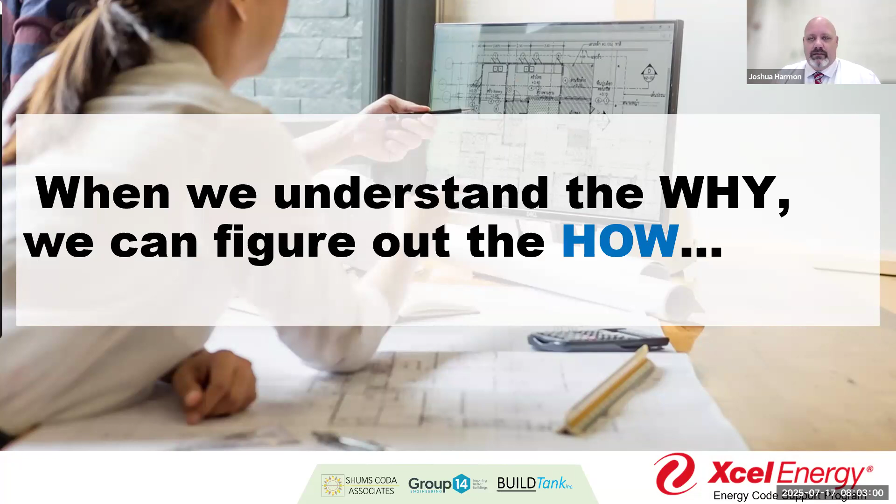Knowing what we know and knowing how you guys know, I like to discuss any type of code conversation. Literally, I'm here for a local government summit, and I've brought the same slide to their presentation, just with a different background. But understanding the why behind the question is really one of those important things that we need to think about as part of this conversation. And understanding that why, I think, is going to be something that really is fundamental to figure out how we properly inspect.

What are we looking for when we do inspections? And when we think about the purpose and the intent of our construction codes, like the larger context of why we develop codes, it's in order to provide that minimum consistency, that uniform consistency in how we build buildings and how we expect buildings to perform in order to maintain that safety, that life safety component. And life safety is not just this fire protection only conversation. It's all about the entirety of how we build communities.

It's more about community safety, right? If we don't have energy conscious policies, or if we don't think about ventilation - how much air do I put into a room, a bathroom, or something like that - that's a life safety issue. But in reality, it is about how that community is going to be successful. So when we talk about some of these expectations, one of the positive things that you have as a state is that you have a uniform statewide building code, right? And so you have uniformity, you have consistency in how we apply building code regulations.

So again, energy conservation, energy use is one of those considerations within that system of building codes. And we know that the energy code specifically is less about telling you what to do and more about providing you the flexibility to do. I was in code development, I was in hearings all week this week for different states and projects, and I was at my home state yesterday before I got on the plane. And we had this long discussion about what we introduce into the new model code.

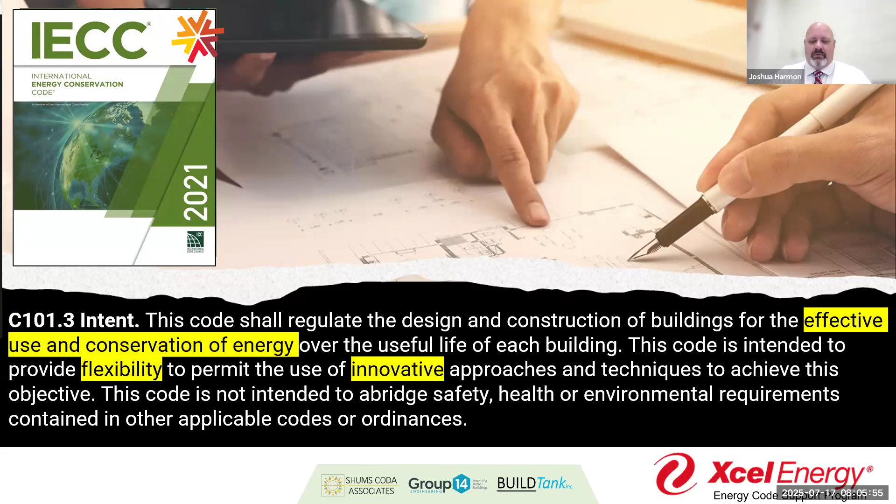But really, we all recognize that, or should recognize, that energy code compliance or general code compliance becomes on paper, right? It's knowing what are those systems, providing proper documentation. We had a conversation with a fire official this week where, why aren't you requiring more details on building plans. And part of the reality is, well, because we don't know what material might be used, or if we make a change in the field, we don't want to come back and say, well, that material is not part of the prescriptive components of your construction details.

So resubmit for plan review, right? We put general terms in like manufacturer's installation instructions, because we expect that when they're installing it, we use the example of roof. Nobody ever submits into, typically, at least not in the plans I get, nobody usually submits on residential construction, especially, the manufacturer's installation instructions for an asphalt shingle roof.

It's just not in there, right? We know that the instruction is on the actual bundle, so when you go on site, it's going to be on the packaging how to properly install it, and when do you put ice barriers or those kinds of protective drip edges and protect those drip edges against water infiltration.

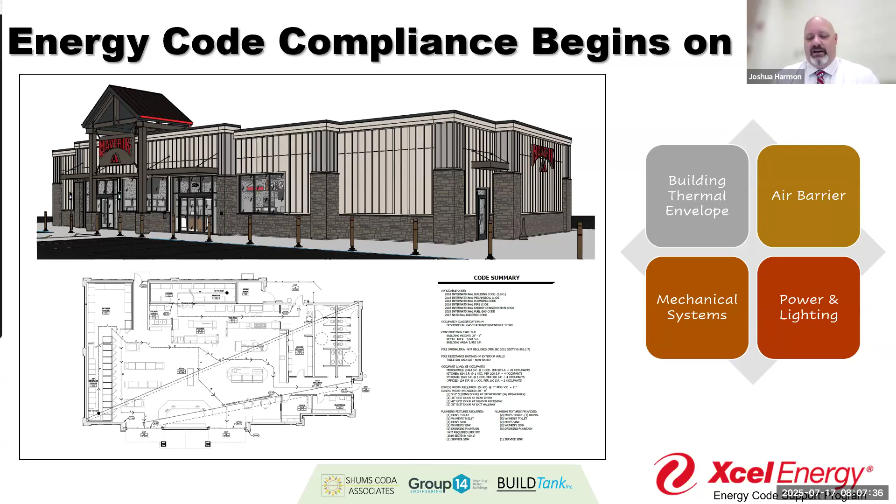Those are all things that we understand begin or recognize through paper, and sometimes it's in simple conversations, simple notes that say these items will be installed in compliance with the manufacturer's installation instructions. But ultimately, no matter how good a plans examiner you have, there's going to have to be a level of inspections required, right?

The building code requires in section 14.5.3.9, it gives us a list of different expectations and times when the inspector, the building official, is empowered to do inspections to verify that things are being done. One of those items listed in the commercial code is weather resistive barriers and energy efficiency inspections, right?

We need to be able to set up what are those expectations. If I'm going out and doing a variety of different things, we're trying to talk about where are places where we can have that efficiency of inspection—not just energy efficiency, right?

If I'm doing a framing inspection, if I'm doing a rough in for my mechanical, plumbing, or electrical, there are certain things when I'm looking for those penetrations through firewalls, whether that's commercial or residential, or through wall assemblies or different spaces, my thermal envelope. Those are all going to be times when I'm doing that rough in—I can look for the air barrier, right? You can see the potential there for that.

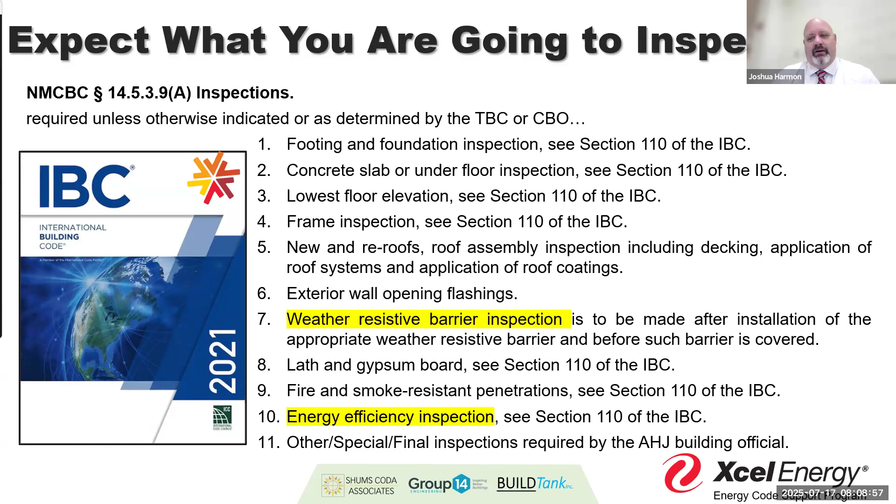Whether that's in the commercial code or the residential code, we understand there are provisions for us to do those individual inspections. Throughout the context of this training course, we are going to talk a little bit more in depth about the different components in that inspection process.

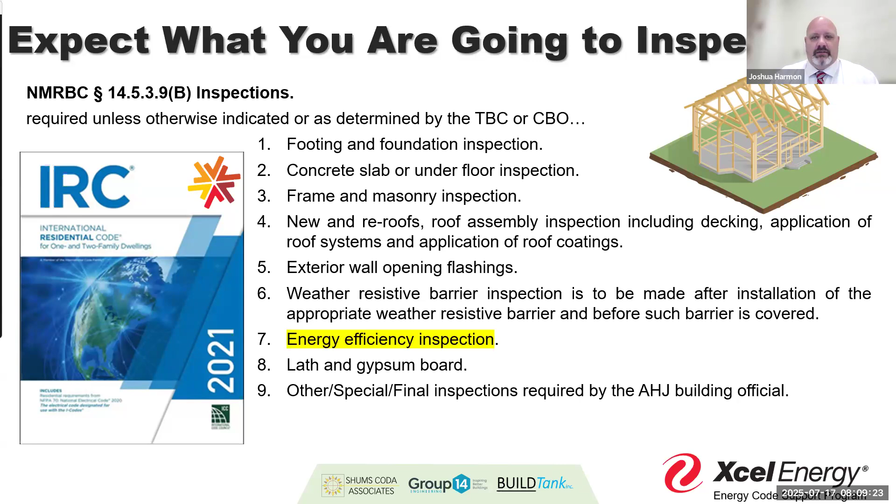One of the technical resources that's going to be on there, or should be on there now—if not, I'll double check, I thought it was on there, but we're updating it. Right now it's for the residential; I think we're updating it for the commercial to make sure that's on there: our different inspection field guides.

Now, I told you we're working on some for plan review as well, so those should be coming up soon. Let me see if I've got it in here. Field guide... I don't see it on there in my file. I'm not looking at the website—I'm looking at, I'm not seeing it on my desktop.

But again, those are going to be resources that you can go to kind of help guide what we're expecting. It's not so much from us as the inspector—I find this is a resource I like to give out to contractors: what are you expecting when I come back for a rough in? If I'm doing framing, what am I going to look for? And then we give a little bit of description in that guide to help that process along.

We also know that the state has a lot of great resources, so whenever you get it—most of you should have access, or I'm guaranteeing you've probably more than once visited the state's website in order to look at different forms and application forms that they have there. When you scroll down to the bottom, we have the checklists that exist, whether that's a thermal bypass inspection checklist, the duct sealing inspection checklist, and different resources the state provides.

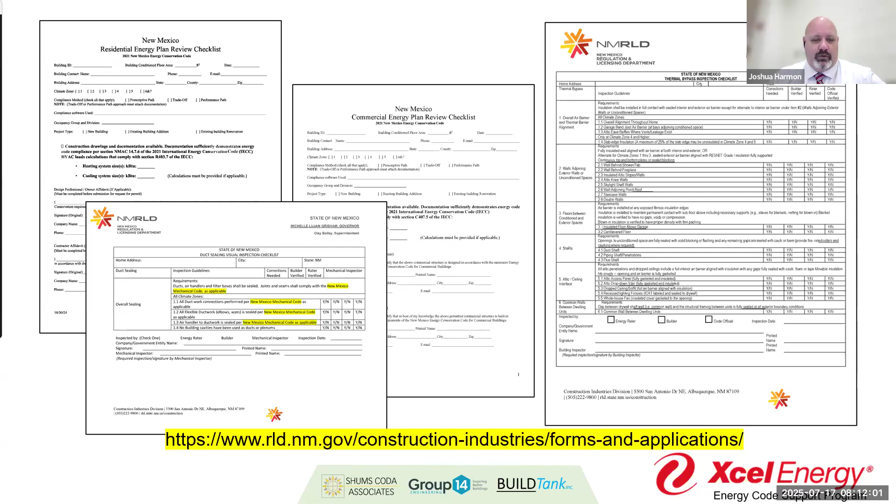The last thing you want is to talk about energy efficiency, but then lose workflow efficiency, right?

Getting back to this overview of what we're talking about, when we think about the primary components, or as I like to call them, the four pillars that make up the requirements of the energy code, I tend to understand them simply. Energy code is these four things: thermal envelopes, air barriers, mechanical systems, and power and lighting control. Those are the things that in my brain, every time I think about energy code, that's where my brain goes.

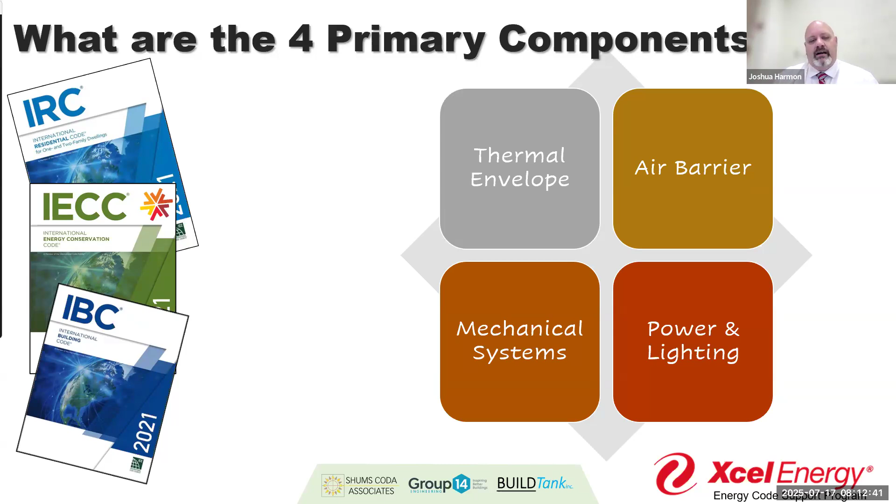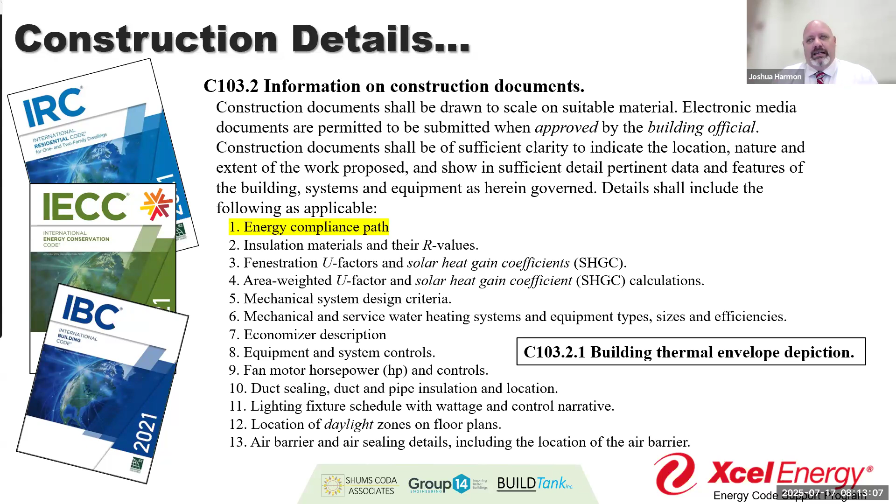How does this compare? Where does this issue relate to one of these four pillars? And it's in that conversation that we understand first and foremost what are the requirements to identify that compliance path. Whether we're talking about the way we design it, review it, or inspect it, it's important to identify and know the compliance path because that's going to affect how we verify or scope our inspection process. It's one of those requirements the code provides.

It's supposed to be on details, but as an inspector, I need to know what the compliance path is, because if I'm following a prescriptive path—and we know there are three different paths provided in the code—let me get my laser pointer out. If I'm using that prescriptive path, then I'm literally checking these things off on a box. I'm going through and I can use one of those inspection checklists, or a field guide or some visual assessment tool, and say these are the things we're looking for, and you're complying with everything.

So that's part of that conversation we need to think about, and again, when we think about how that's different from a simulated performance or ASHRAE compliance in commercial, or one of those performance ratings on the residential side of the conversation, right?

Well, in a performance path, I'm not the only person verifying compliance. If you're doing a simulated performance, you've given me a proposed set of conditions, and that gives you flexibility, that trade-off, to come back and say, well, we're going to change this up and go this direction. We're still going to get the same target number, dollar value, or performance evaluation index, but you have a bit more flexibility than with a prescriptive system.

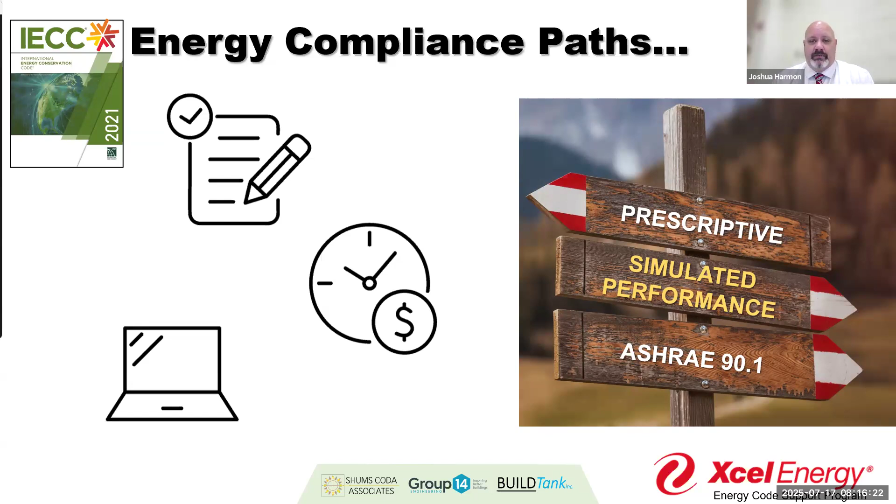Now, one of the questions we have in the chat: if a submitter chooses prescriptive, do they need to submit the REScheck or COMcheck? Actually, no—it's an option within the prescriptive path.

So when you think about prescriptive compliance—and it's a great way to move to this slide—prescriptive compliance is performing compliance with all the requirements of these five sections, especially in commercial. Now, residential, we know the additional efficiencies are not part of the prescriptive requirements of that section for residential, but within that building thermal envelope, there are certain things we're looking for.

A lot of time, a res check or a com check, which we'll be talking about more in a couple of weeks, is a great way to centralize plan review and changes to that insulation value. But res check and com check are really just a way to trade off, or to more directly say, here's all the insulations that should be in this building.

An example would be, and you see it a little bit more in commercial I think than you do residential, but you could say here's my wall detail, and instead of every one of those 15 different options, I might have a slide that helps that conversation.

So in the context of, I can have all these insulation options within my design on my sheets, and my res check or my com check is going to have a very simple evaluation. It's going to say you're going to have a U factor of this, and it gives you that flexibility to change it around. We'll talk a little more about that.

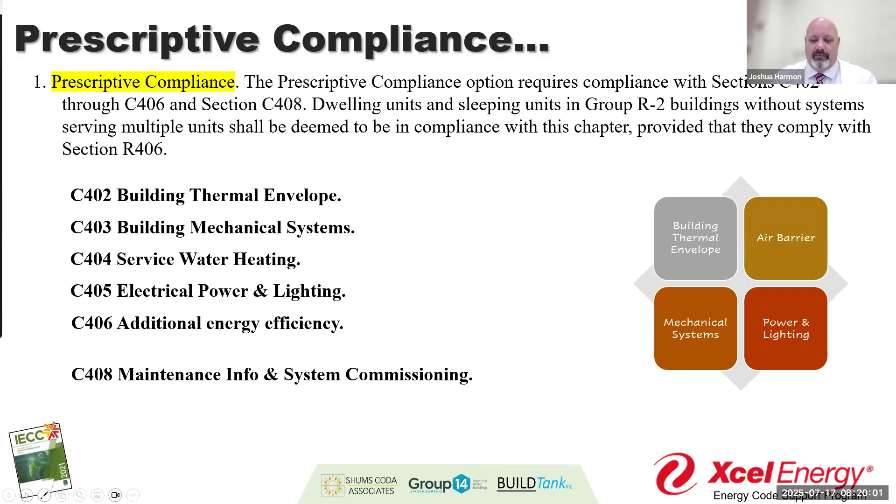So hopefully that answers some of that, and we can always talk more about it later as we go through the rest of these slides. But again, prescriptive is telling me I'm going to be looking at all these sections and looking for those requirements and expectations. If I'm doing that performance path, I'm looking at a report, and I'm just making sure that the minimum things of the report are in there.

So is it possible that I could build a building that has no insulation? Absolutely. I could find a way to track that heating and cooling load and get it down to an all glass building. That's why the code, and we can talk more about that later, says if you have so much glass, you have to move to performance, because it's not required to have an R49.

I could go with an R25 and still be able to, I could have my fire rated assembly style, and just call it a day and find a very efficient mechanical system, and with lighting controls probably come close to getting what the code would require. It's all about flexibility, right?

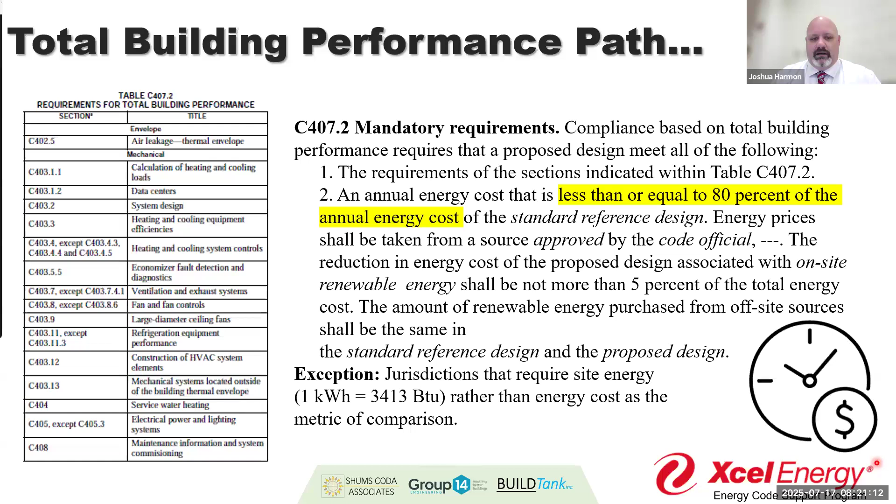Like I said, a little bit about ASHRAE. ASHRAE 90.1 has its own 3 processes: prescriptive, energy cost budget, performance rating. Very similar to our normal energy code, but again, it's a completely different way to look at it.

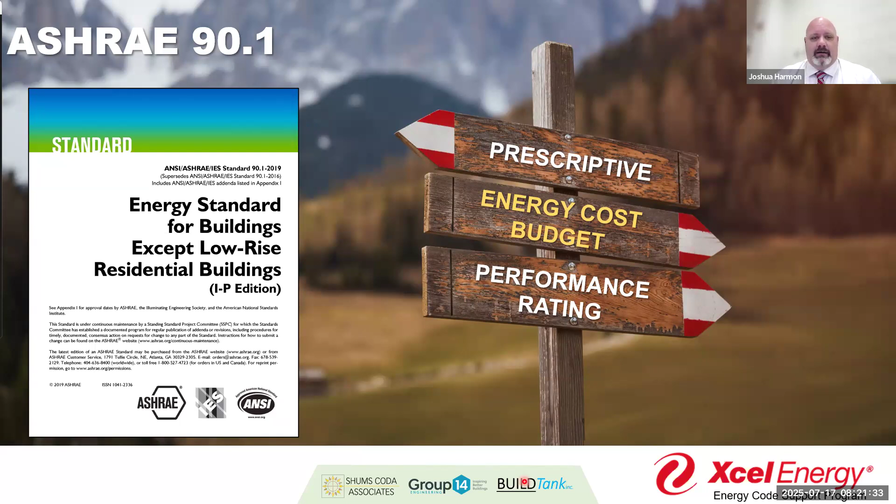And maybe someday, if we have more questions or an interest level, let us know in the survey if there's an interest level. We could talk more about ASHRAE 90.1 as a code.

But again, when we go to do those inspections, we normally see them in these 4 different contexts, and it's all about understanding what those expectations are, right? That's why we've kind of broken our little guide there for residential, and eventually for commercial, into these 4 pillars. You can tell who helped draft the first set, because I'm all about my 4 pillars or simplified designs.

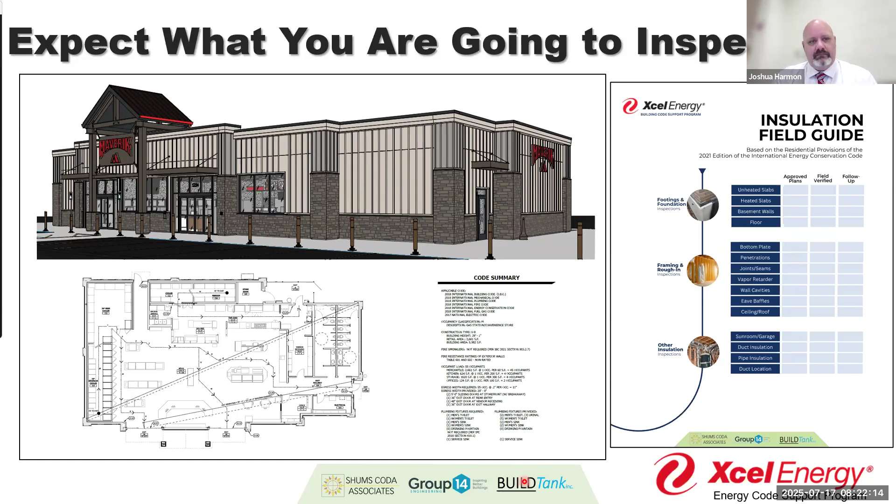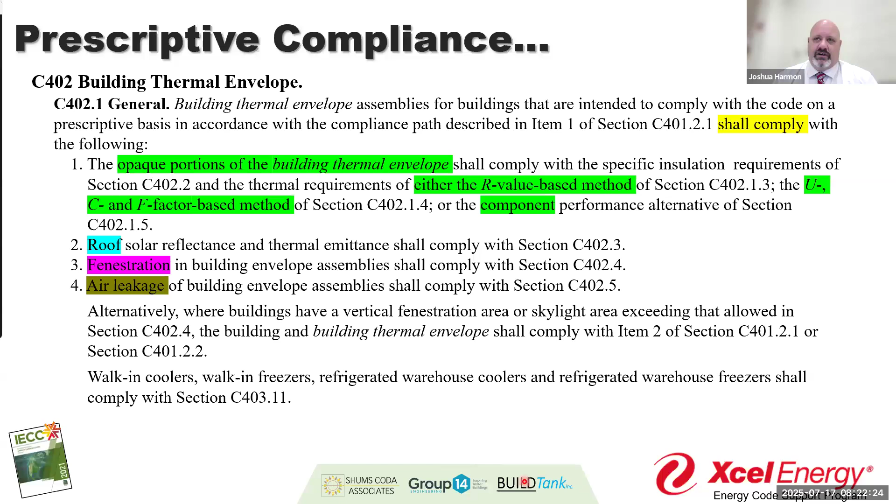When you think about the prescriptive process and the envelope itself, we're looking at a variety of things, whether that's the wall, the roof, the fenestration, the air leakage of that envelope, because we're really trying to control the envelope and how it affects heat loss and heat gain. The building's exterior wall envelope is defined in the building code as that series of materials, components, and assemblies that protect against the effects of the exterior environment, prevent the rain, right? The rain that just came through the Panhandle and maybe part of Clovis.

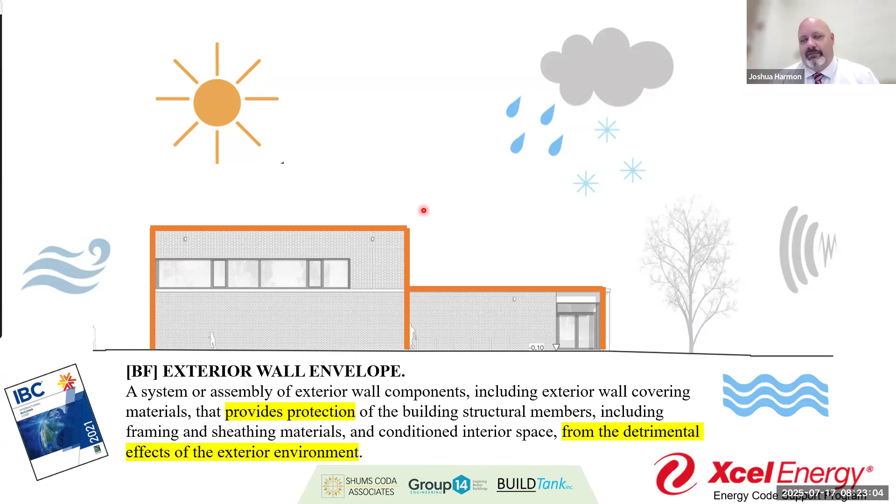In this northern part of the state, I was able to stand inside the building and not get affected by that rain. However, I'm not as sure that we're protecting against the thermal envelope, because I can feel the humidity of that rain inside the building. That's where we get into the building's thermal envelope, which is trying to enclose that conditioned space and isolate it so that when I sit in this room, I'm not affected, or I'm less affected, by the 84-degree temperature and high humidity right now outside.

That's the difference between a wall envelope and a thermal envelope. One is to protect us from the environment. The other is to enclose and isolate conditioned space. So think about those when we think about our inspections. Are we looking for the wall envelope, or are we looking for that thermal envelope?

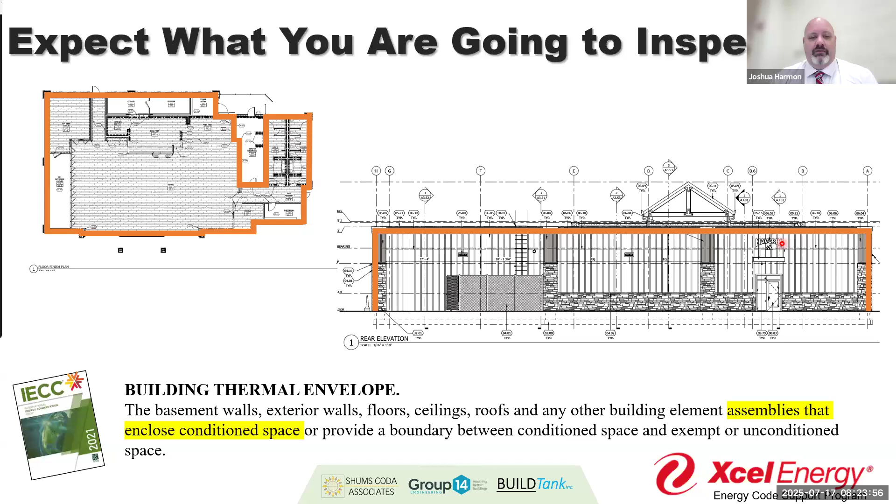This is probably one of those great places to remind us that the code gives us ways to lay out those different assemblies and the insulation that we associate with them. I find it easy a lot of times to relate to our fire rated assembly concepts, and so some of those expectations about the continuity that we see within fire rated assemblies, we need to see that level of continuity in air barrier and thermal envelope design.

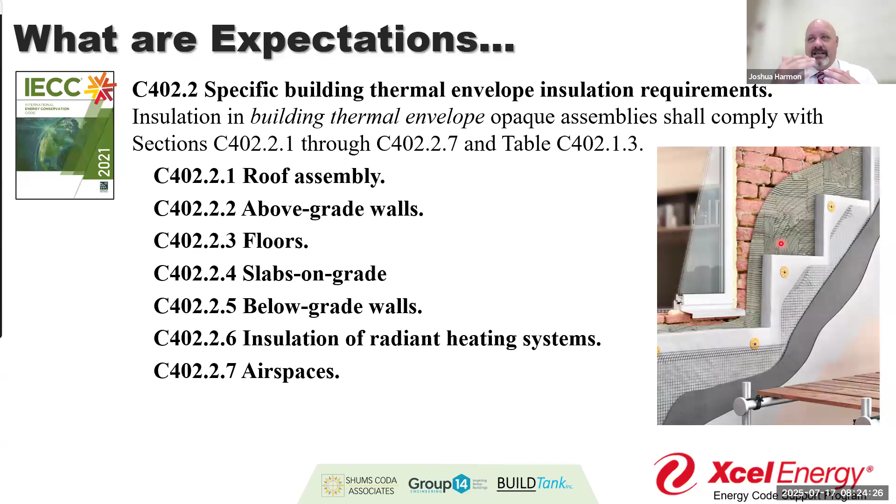A lot of times in commercial, that's a little easier than in residential. One of the things we're going to be doing here in Amarillo at one point soon is trying to set up a building community coffee, or coffee and code conversation, where we're going to go to a house and try and smoke it out.

My plan is to do smoke barbecue and smoke the house, make it a smoker's day. That way we can have some food while we watch the building pressurize, and then see if there's air leakage and how much air leakage we're having.

Those are good things to think about when we talk about those inspections. We'll get more into those air barriers and insulation later.

When we think about our inspection field guide, the way we laid it out was based on my expectations for inspections. I typically do footers and foundations at the beginning of a process. So I've separated those out, or we tried to separate those out, and say, depending on what we're doing, what's been approved, and where it's at on the approved plan.

This might be something where you mark it down and say this is on A3, and we don't have a heated slab. We're doing basements versus a floor or a slab, whatever might be appropriate. And then, what did we do to verify those things? This is just a simple resource we put together to help.

Similarly, when we start talking about those framing inspections, those rough-ins, what are we looking for? We're looking for that bottom plate. We're spending time looking at it to make sure it's connected to that foundation. It shouldn't be too much time—it would be very quick for us to check, while looking at the bottom plate, for the right connections, whether we're bolting or whatever we're doing.

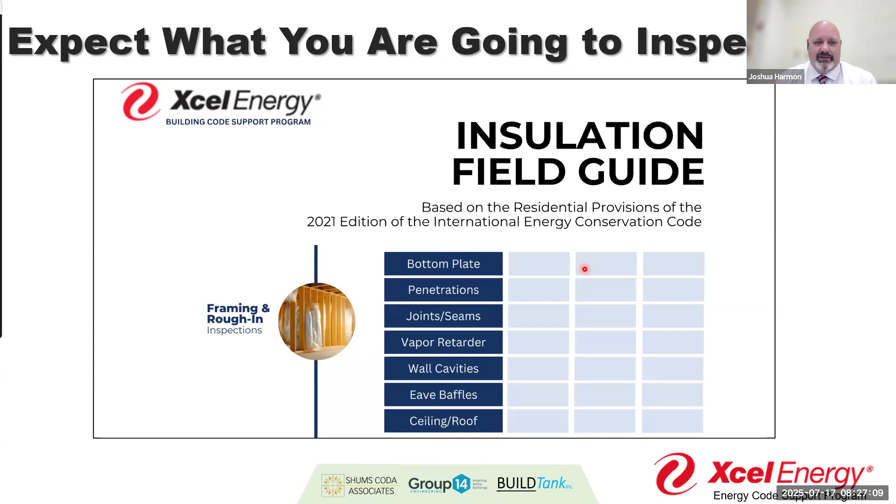Think about it in those contexts: how do I do a framing inspection and then roll in my energy efficiency components? We don't want two inspectors looking at the same thing. We want one inspector doing the job.

Thinking about insulation expectations and the ducts, whether they're going to require insulation or not. If we're doing sunrooms or attached or detached garages, we're looking at those garages for firewall separation, and making sure we verify thermal isolation as well.

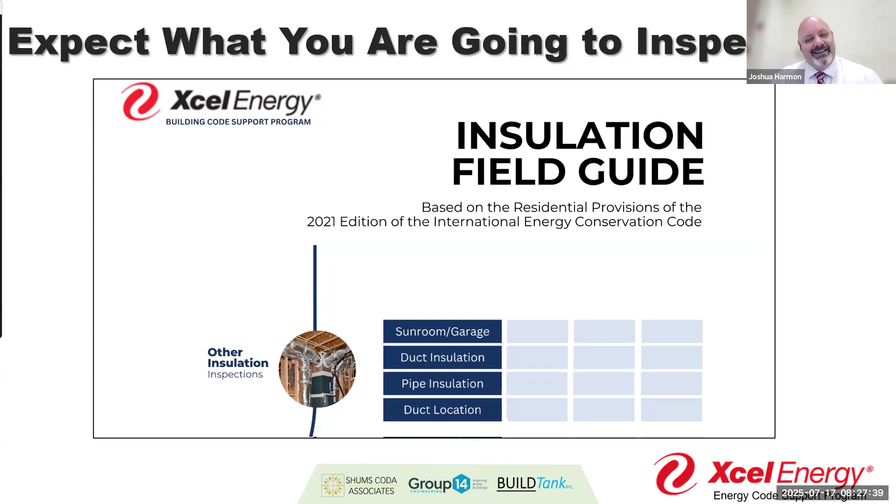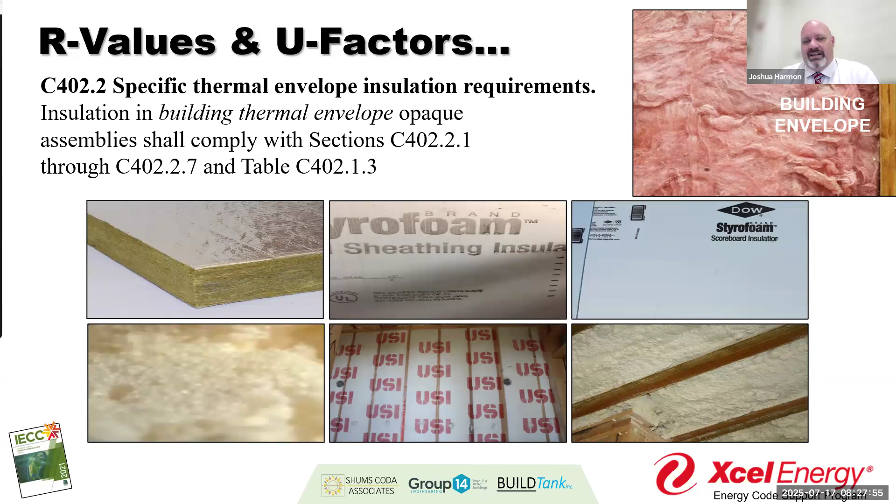When we talk about these types of things, we need to understand that there are a variety of materials that can be used to insulate these wall systems, which is why compliance paths are so important. We could start to see some trade-offs and movement within the material as long as we understand how it's going to affect the building.

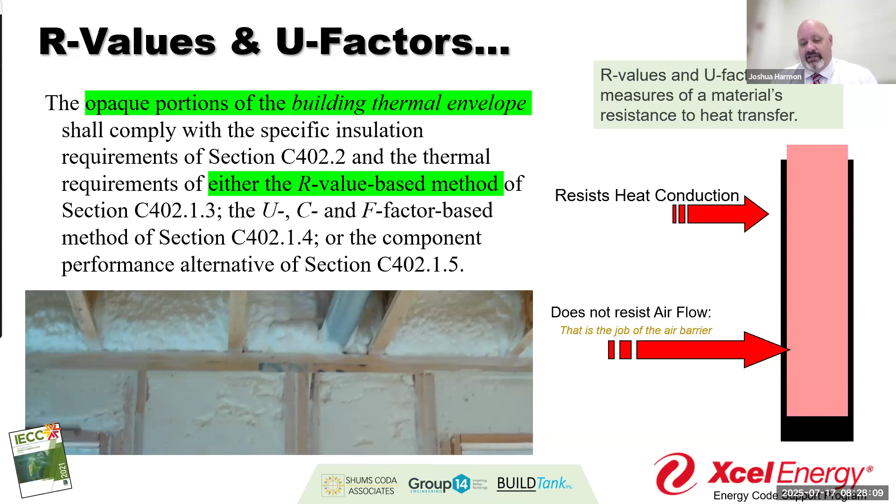Knowing that also ties to whether or not we use REScheck. Am I doing this compliance based off an R value? If there's an R value, then I'm going to look at this particular table, whereas if I'm using a U factor, there's the U factor.

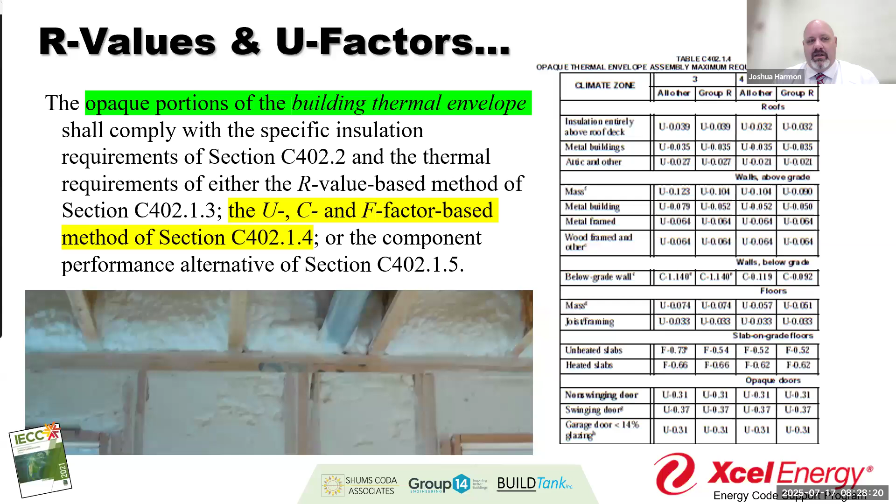If I'm looking at a U factor, which is the whole assembly, not the individual cavity material, but the whole assembly, then I'm going to be looking at a different table in the code, and more importantly, I'm starting to get that flexibility in how we calculate.

Remember, the U factor is a calculation of all of the materials within that tested or evaluated assembly. There are a million different resources and ways to find it, but in this process, we're adding together a wall design to get to an area weighted U factor.

We can start with an R13 and that R13 gets us to this 0.057. But what if I change that to an R17? What if I don't go to the R19, which is 0.0446, but I want to go to an R20 with 3.5 continuous? Can I do it?

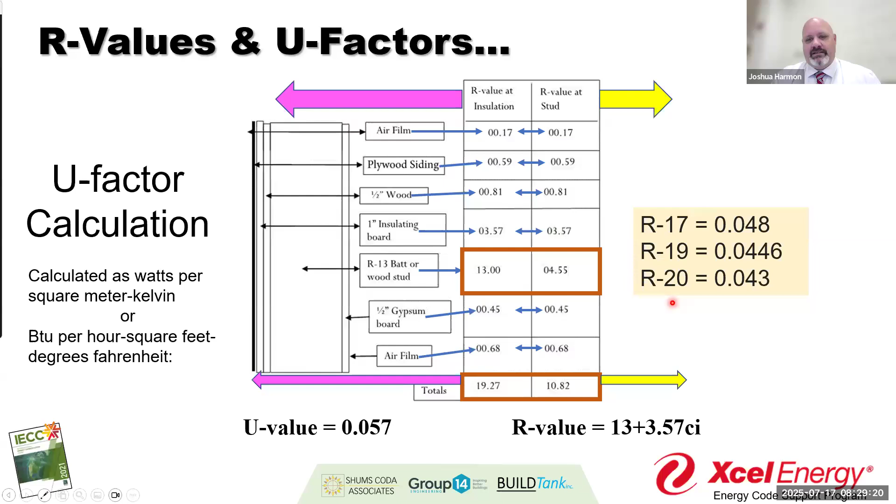There's a prescriptive way to do it. Yes, there's also the R value table, and there's a U factor way to do it through the U factor table. So again, that provides flexibility, but that's not the only way we see it. Kind of like we were talking about, REScheck and COMcheck come in, and they're not the only ones—those are just free options on how to provide that total UA.

Different wall companies—we've shown one from Dow, and I can't remember the other one—will actually help us create those calculations. We've talked about resources during our insulation deep dive about ways to include all those components to calculate: when do I need an air barrier, what type of material am I using for insulation, what's my wall size, and then what is my calculated U factor?

Again, it's math, it's not science. So part of it is finding the right calculator to get you that information.

So again, what we're trying to show is that we have that flexibility, and sometimes those COMcheck reports are going to be used for us to say, okay, what different options do I have within that insulation variable?

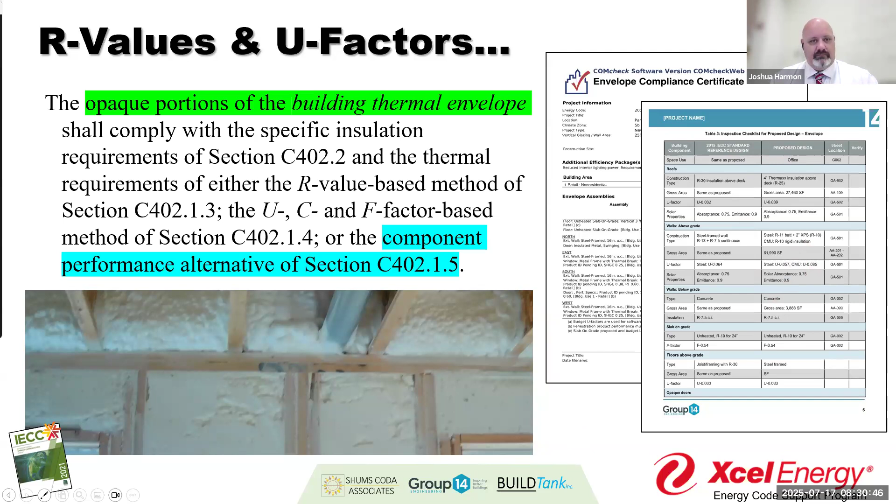We can see all kinds of different insulation schedules. I'm seeing more and more where designers are taking—I'm not saying it's the easy road, but it's a little bit less paperwork—insulation schedules put into the document, into the spec sheets up front, with notes, and then the detail pages all say refer back to page T3, page H, or G2.

The table is there so that they're not going through and recalculating all the details. Because there's going to be some plans examiner like myself who says, well, detail 3 on page G6 or A6 is not consistent with detail 4 when it comes to insulation. Yeah, we missed that one.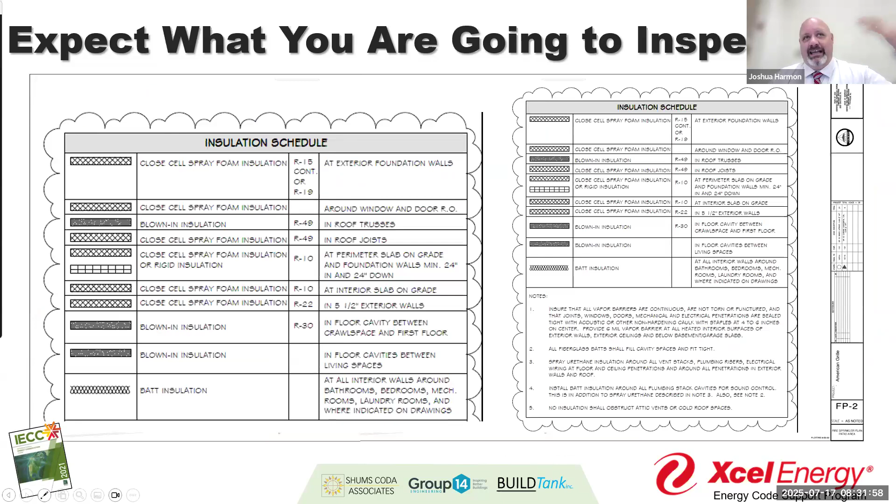So again, you'll start to maybe see tables that show up to allow for that flexibility in design, and we'll talk more about that as we go through. Proper installation and proper inspection means knowing what those things were and making sure they're on the plans, because I can't do it if it's not on paper. If I don't have something to hold them against, how do I know if it's been properly installed? How much overhang are we supposed to do? How much protection against construction site damage versus traditional work space damage?

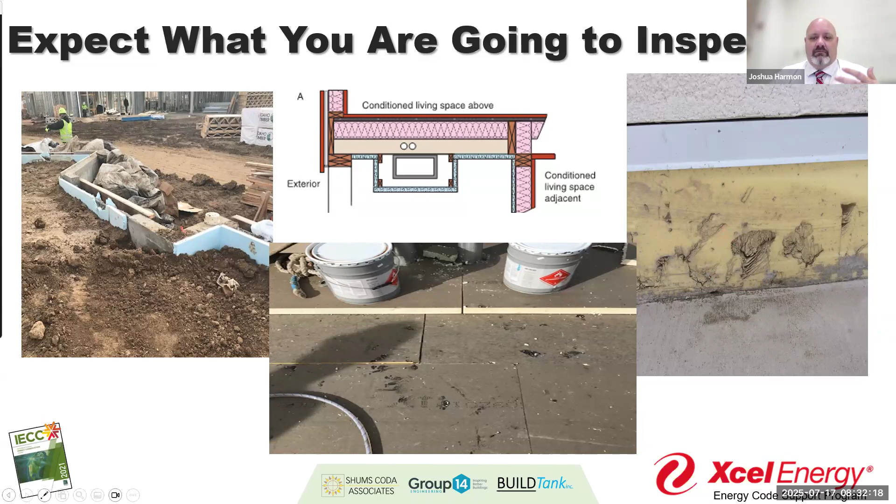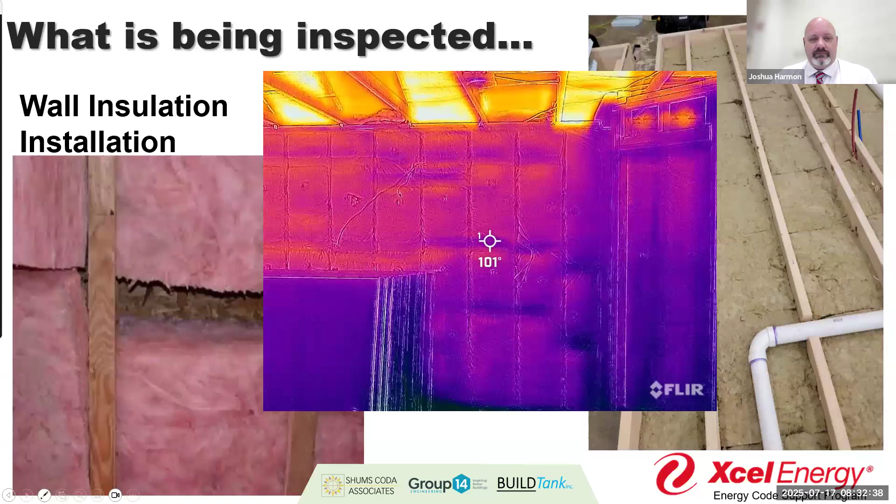Gaps that might start to exist - the expectation in the design is we have consistent, continuous insulation. We start to see these gaps easily at one stage of development of construction, whereas later in construction, wait a minute, you didn't fill it in. Then I come back with a thermal camera and I can see where those gaps are.

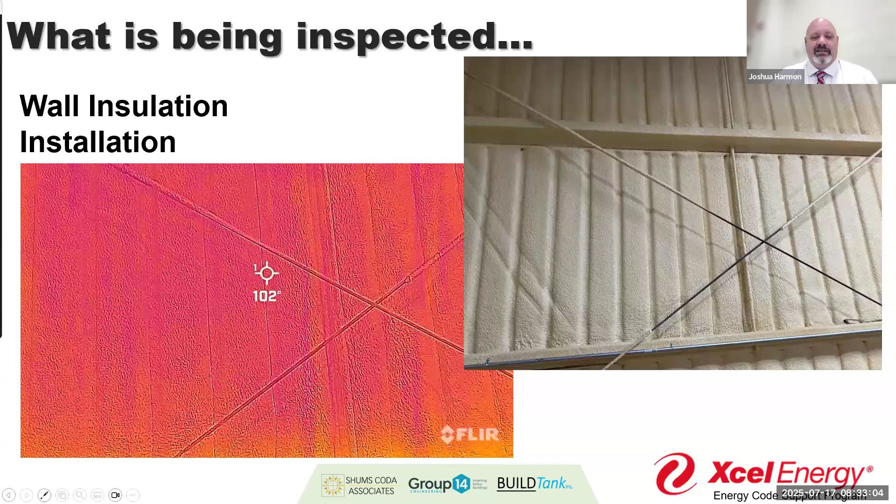We can see the impact of different ways of installing insulation on heat gain and heat loss. This is an example of a steel building that had insulation installed post-construction to reduce heat gain. Outside temperature was 116, inside wall temperature was 102. Why the change? As you can see by the next picture, most of us know that system is going to retain its heat - it's metal, it doesn't have bridging, especially on an exterior wall of a metal building. But by insulating, we're controlling some of that heat loss.

And again, they can come back - this is a semi-heated space, so it wasn't a huge deal. Some of you may know where this is at, but if they were to install thicker insulation, they could control that heat differential more effectively and more efficiently.

So again, we're controlling some of that and we can start to see where we've got it. If this was new construction and my details called for this, or for that thermal bridging, this would be a great way to show it's not working - you didn't install the right spacer, because I'm still getting huge amounts, not getting any dissipation or change in that temperature.

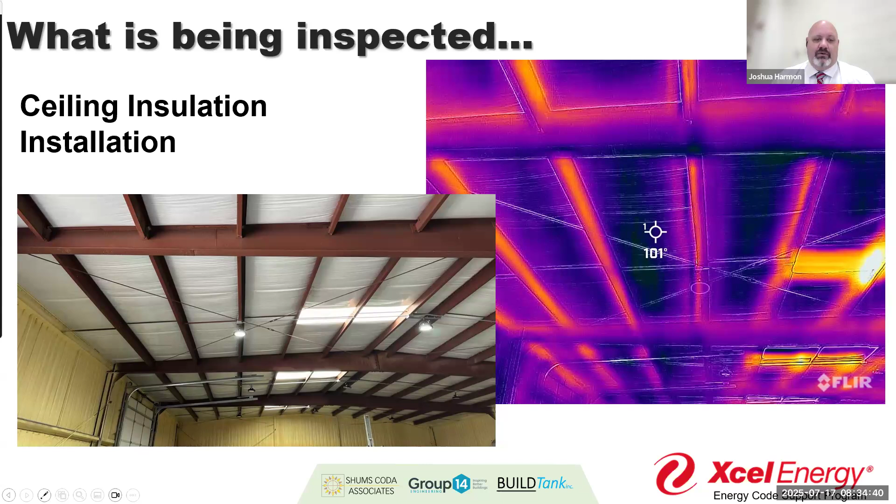So I don't have to jump on the cherry picker, the ladder, the lift, and go up there. I can sometimes do these through simple devices, tools, and resources that we've shown you before - whether that's a whole handheld camera, the little one that I keep bringing around in my bag over here. I can see different levels. This is in a drywall separating a garage from an interior space, and we can see where there's a cavity missing insulation, and how that's impacting that wall.

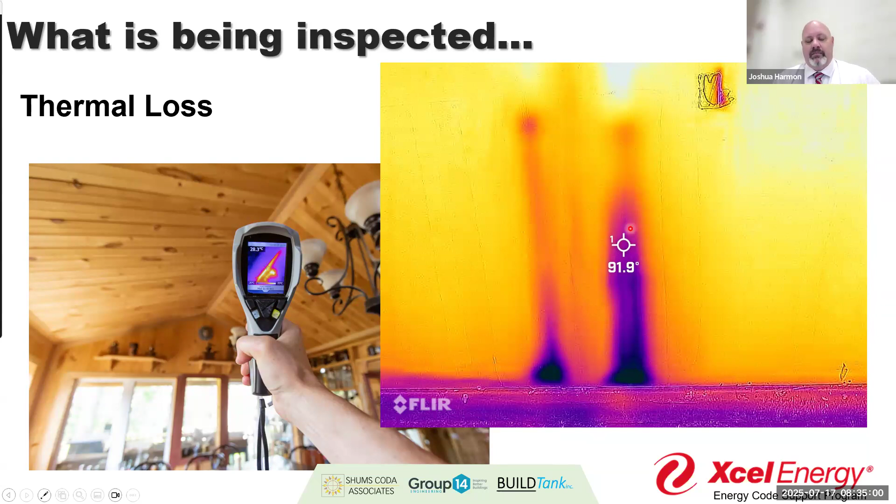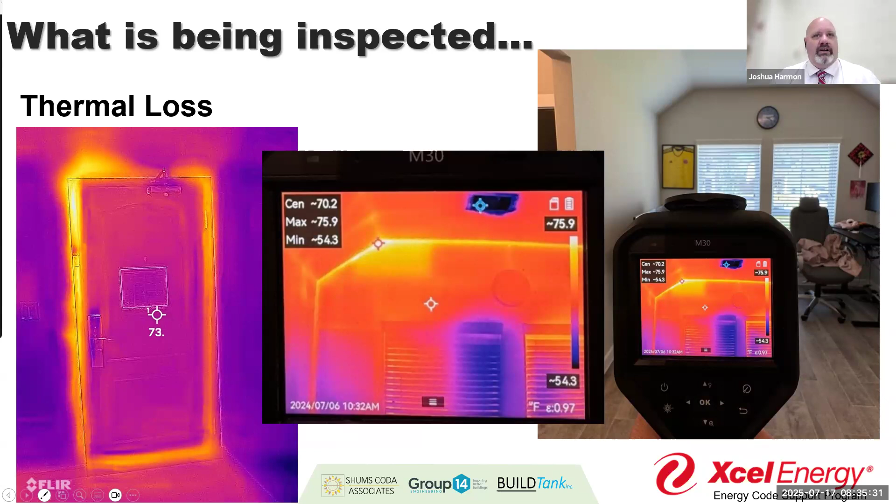What we're trying to do with this entire building thermal envelope is all about protecting against thermal loss and heat gain. If I'm losing and gaining heat through this door system, or through corners that aren't properly sealed or continuous in their protection, that's what creates condensation, and it also creates a greater need for our mechanical system operation. Again, some more examples of that.

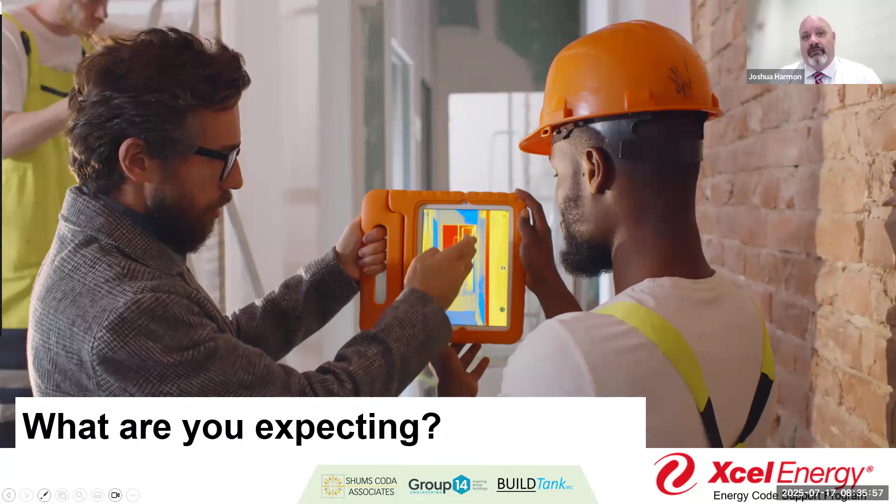When we think about our visual checklist, we'll walk through this a bit more when we start talking about it in the direct context of insulation inspections. We can verify some of those air barrier envelope components using our checklist. But it all comes back to what we're expecting to accomplish with this envelope. Remember, the envelope is not just the wall, not just the insulation - it's the fenestration, making sure we have the right doors, windows, and skylights.

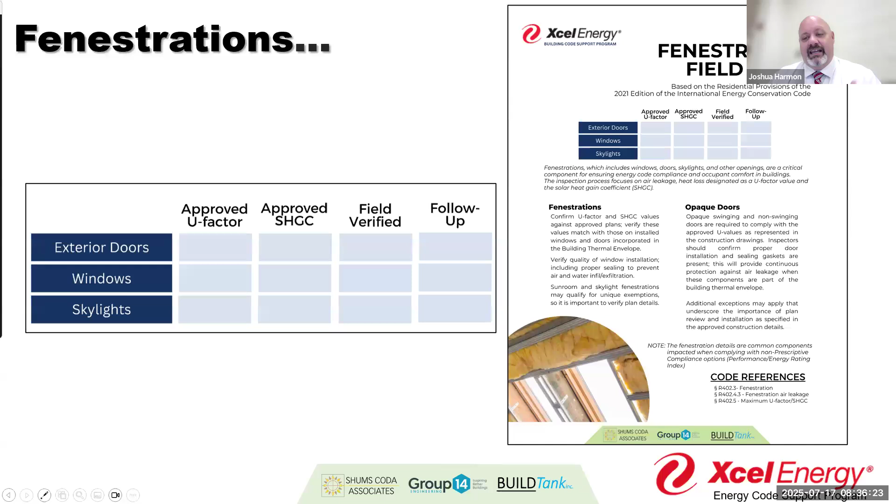It may seem like a simple set of components, but the proper installation of these types, and the proper material selection for thermal resistance ratings, can have significant impacts on how the equipment is sized, and on occupant health.

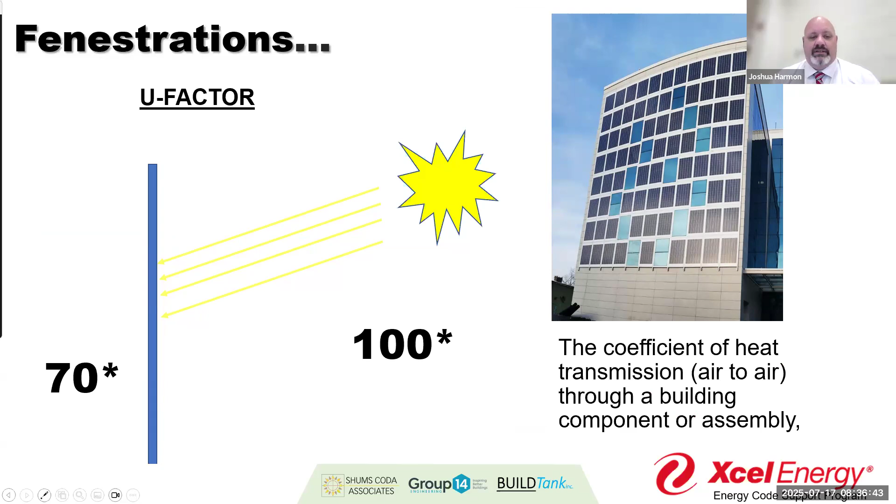And again, what we see there is the U factor, which is a calculation. The two main methods we see with most windows, fenestrations, and doors are the U factor, which is how much heat transfers through that material over time, versus the solar heat gain, which is how much solar radiation itself impacts interior design temperatures.

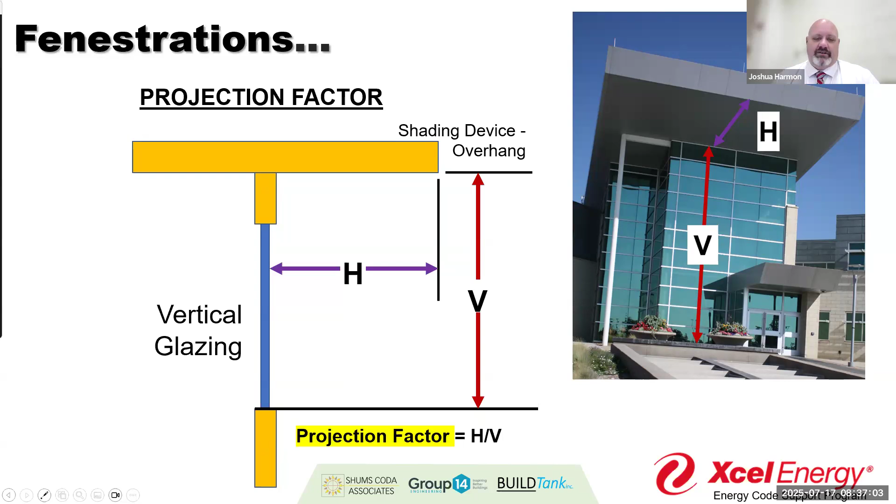Now, remember, when we're talking about commercial specifically, we get into projection factors, but that's not necessarily something we always see in residential. So that's going to be a separate discussion when we start talking about fenestrations in a couple weeks as part of that inspection and design series.

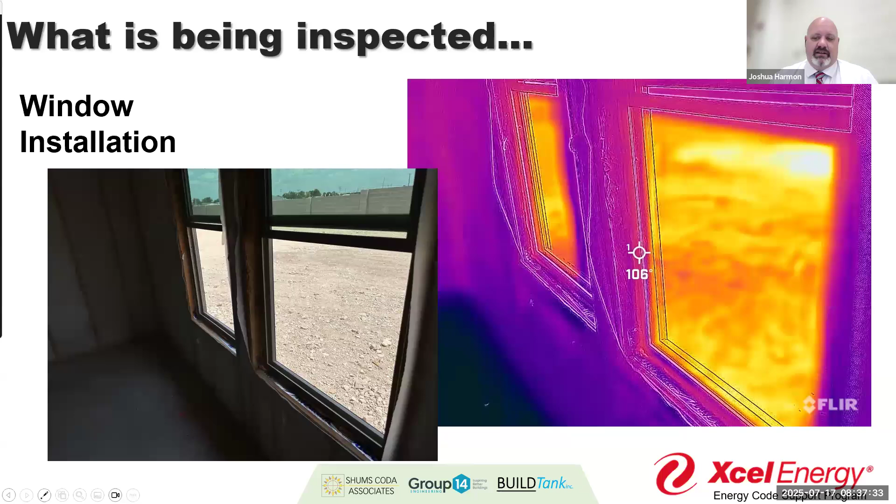But again, we can see how the glass can perform to restrict the movement with proper sealing and proper flashing. Those are ways to control air and moisture flow in these areas of what I call first deterioration, where we're going to see the type of deterioration that can be reflective of poor installation.

And again, we can test those different systems, whether they come as a unit from the store, or we can test how we're testing them and what those expectations are if they're site built.

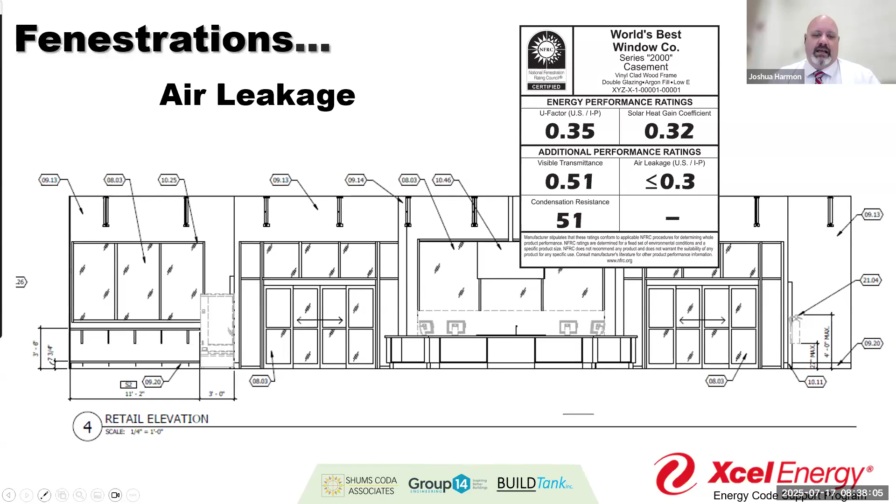We don't just want to confirm the thermal resistance, though. We're looking for both thermal resistance and air leakage, because just because you have great solar heat gain and then you have cracks all around the window, you're letting the air and the heat through. You have to look at both of those systems in concert. And a lot of that comes back to having proper detailing.

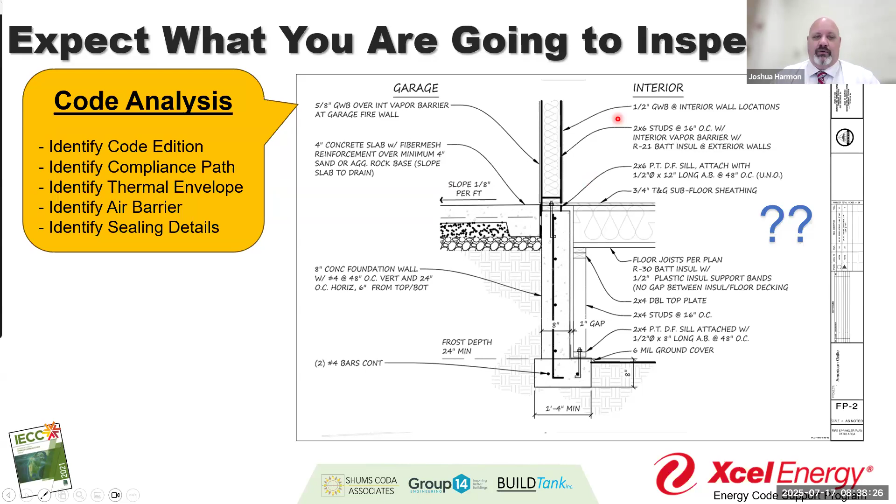Where am I supposed to be looking for? This is almost as much of a conversation for installation or contractors as much as it is for inspectors. Because if you have the right details, the right sealing expectations, then you'll know where you're supposed to be looking for, where you're applying that sealant. Because again, air barriers can't be an afterthought because air movement has consequences.

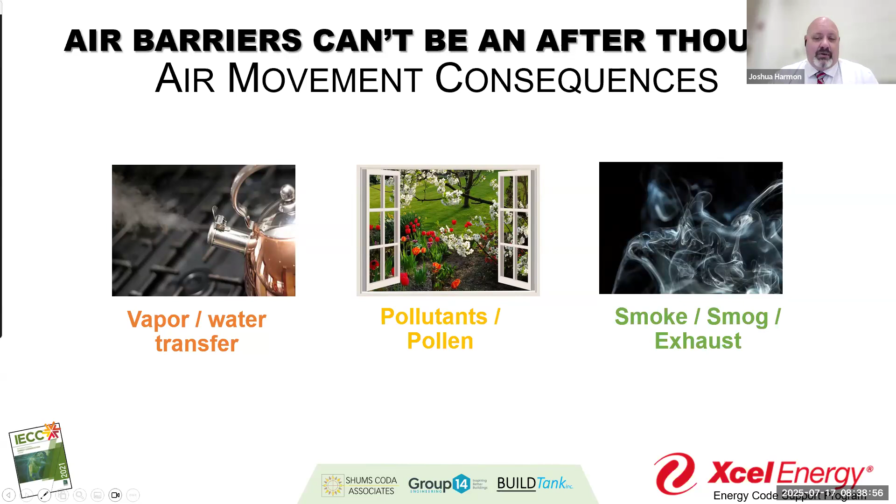We know that air movement affects a variety of different things, from water and vapor transfer to indoor air quality - smoke, smog, exhaust, humidity. All those things are reflected in the movement of air through these types of assemblies. And most of us have been in this business long enough to know when we see something that wasn't protected properly against moisture transfer or heat transfer.

And the energy code provides a long list of considerations for testing and how to prevent or mitigate control - my favorite C word for codes, it's not codes, it's controls - and we prevent this kind of air leakage through the building envelope.

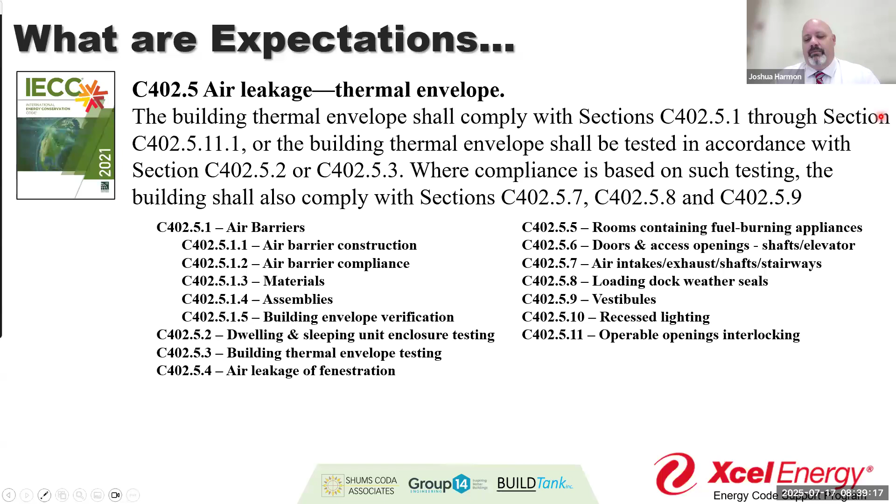And we provide in that inspection guide a list, and it's pretty long, but they can be broken again into several categories. Our list is not an exhaustive list or categorization of it. I tend to focus them in these general five. Like I said, I'm simple.

So to me, it's the general things: the electrical pieces. So when I'm doing electrical rough versus plumbing rough versus, just general when I'm looking for fire or separations or thermal separations between conditioned and unconditioned - this is when I'm looking at these things, or utility shafts associated with my mechanical inspections.

So for me, this is one of those things where, depending on who's doing those inspections, I might carve out different pieces of this to reinforce with my electrical guy. Hey, when they're putting in boxes, making sure we're sealing, not just for fire, but also for moisture, making sure we have the right boxes so we don't have air transfer.

Same thing with plumbing fixtures. If I'm doing the plumbing and I find I've got a bathtub or stall along an exterior wall, I need to make sure that's properly insulated, not just to prevent moisture inside the space, but against that interior enclosed or unexposed cavity that's going to exist between that tub and the wall.

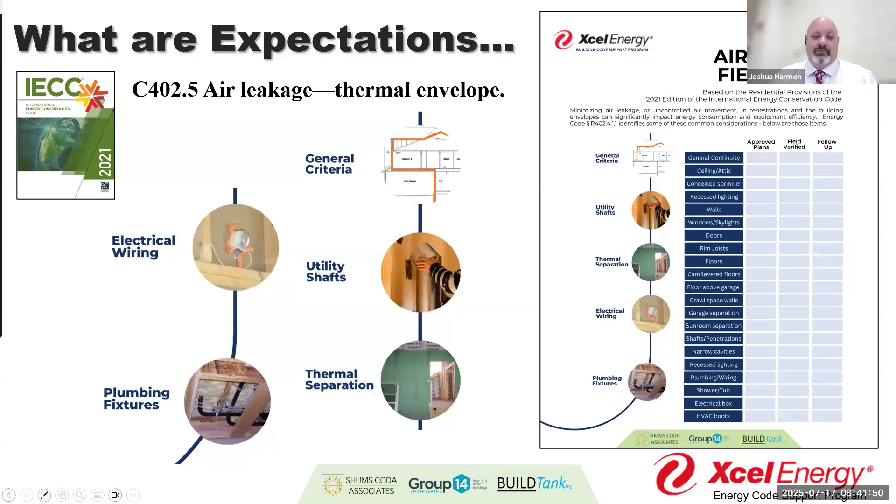Many of us have worked in or visited buildings where the office staff is always complaining that it's too hot or too cold, because they're adversely impacted by the neighboring non-conditioned space. And that's why we end up having fire safety issues with plugged-in heaters and coolers - more heaters than not - and overloading electrical systems because you've got 15 fans or 15 space heaters, because you just don't have good control over that conditioned space, that air barrier.

One thing we have to ask ourselves in the process of inspection is what type of testing is going to take place. Is there going to be testing? When you think about it through the state's visual inspection checklist, we recognize that there are not testing capabilities, testing agencies, or capacity in every jurisdiction. So are we doing testing, or are we doing some type of verification, either through visual or through the checklist? There may be requirements under other compliance paths, which again drives us back to that compliance path.

Based on that compliance path, I may have to exceed the code minimum air leakage. I had a project the other day, a building trying to use a performance path for residential, and the performance path said I needed 2 or 2.5 air changes per hour. The code said 5, and the mechanical design and the contract documents themselves said 5. So it became this question: well, which are you doing? Because if the building construction documents say 5, and the mechanical design expects a building with 5 air changes per hour, but your compliance path option is 2 to 2.5 air changes...

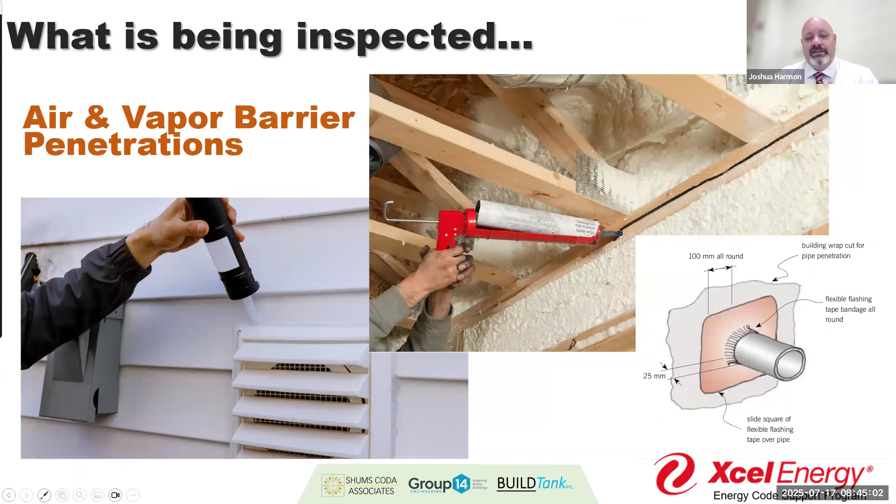So this can have a significant impact on compliance. The compliance path is going to have a significant impact on what we're expecting out of field testing and verification. As an inspector, I'm doing my part to make sure everything is properly sealed as part of that air control system, sometimes just by walking around doing that visual assessment.

I talked about these a little bit earlier. If I'm doing my framing inspection and looking at how that sill plate and bottom plate connect to the foundation, and I see this, I can very quickly say, hey, we need to figure this out - what are we doing here? We're going to have moisture and air movement. If I'm doing my mechanical installation inspection and I see the compressor, and this conduit going through the wall, I'm going to say, what are we doing to seal this? And if I'm doing that sealing process and I see this, I've got more comments and questions coming after.

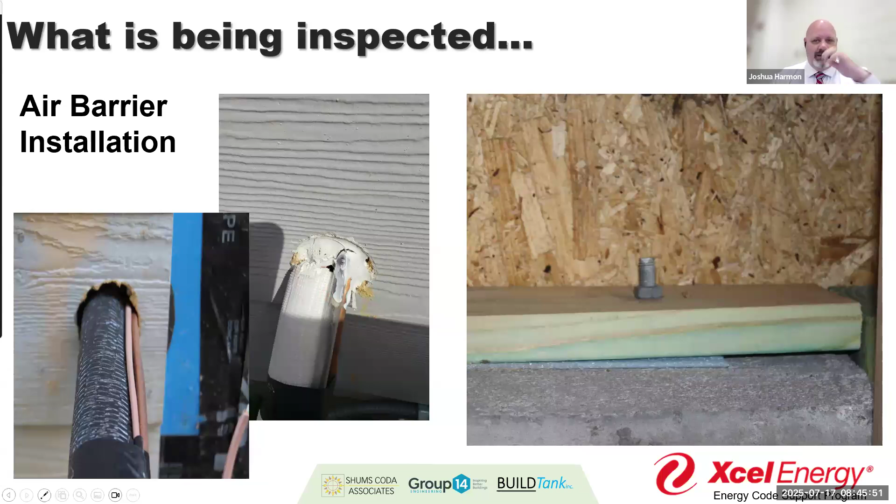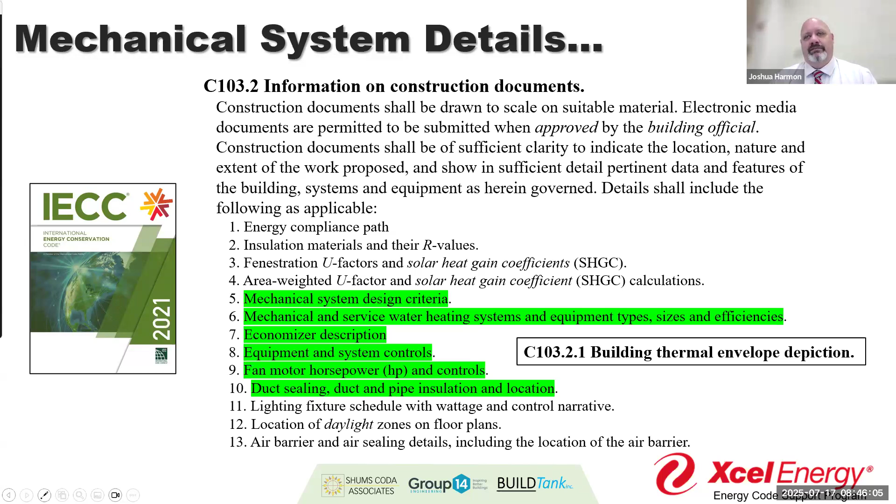So again, whether we're talking residential or commercial, how are we being tested? How are we being verified? Insulation is not the end of the conversation - we'll spend plenty of time talking about this in greater detail, but mechanical systems are a critical component. And you know how I like to keep it simple - I've had several people suggest it's great to have this consistently reinforced. Keep it simple: it's calculation, it's distribution, it's equipment selection, it's controls.

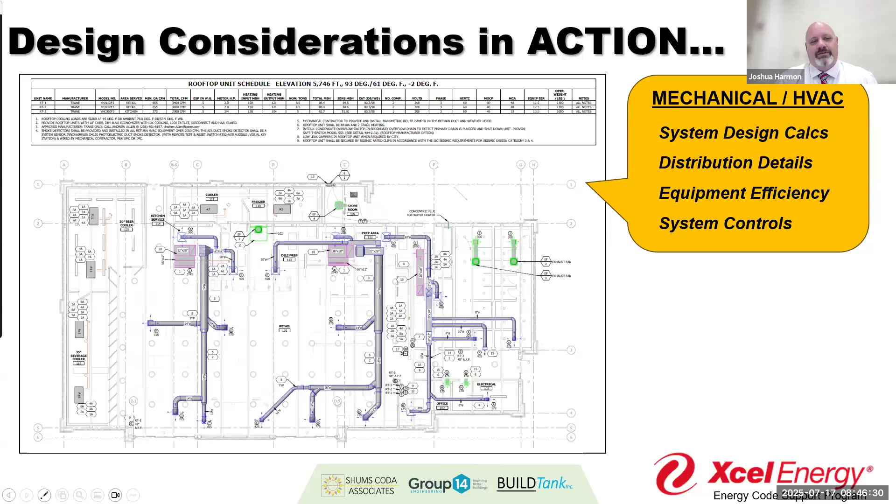Four basic concepts when it comes to mechanical - that's true in mechanical, let alone energy mechanical. These four main subpoints within the mechanical system, we've tried to lay out in our inspection guide and in our plan review conversation guides. But there are plenty of options on how to verify this beyond what we've suggested.

Making sure, as an inspector, if you're telling me this is the area that needs to be conditioned, and I see a pipe chase or duct going somewhere else, I'm going to ask where that's going. Oh, we don't know, we just put it to that room. Well, that room's not supposed to be conditioned, is it? So you're adding more discharge than what that fan was designed to put out. You're going to affect how that fan works, or the exact opposite - you're not conditioning this space, which is supposed to be.

I had one recently - a very large building where they were calculating equipment size based on different designs, and they had calculated this piece of equipment based off a gym at the end of the project. I asked the clarifying question: am I right to understand you're using RTU 7 to condition the gym when you've got RTU 13 right next to the gym? Are you sizing these right? Oh, we didn't think about that. Yeah, that makes more sense, we should do that - let's take the 135,000 BTU off this one and put it on that one, instead of running a 25-foot long trunk or supply line to service a facility, where you're just going to have thermal loss over the process, or more impact on airflow.

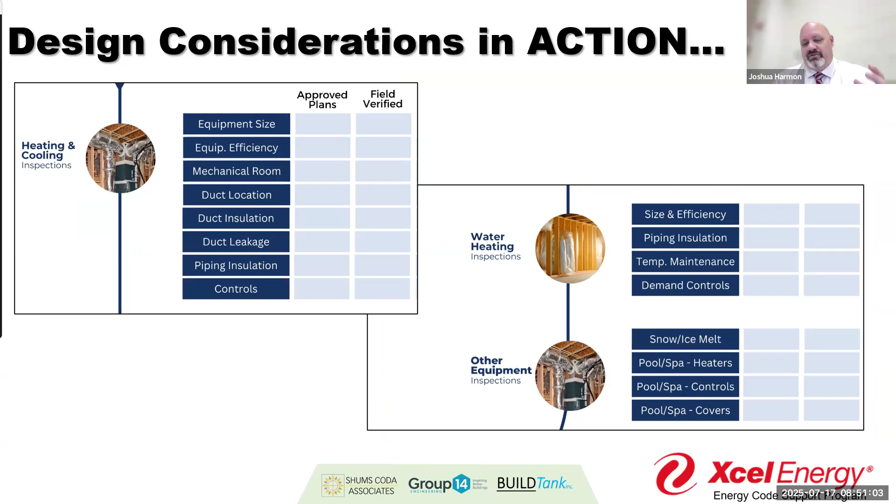I think of the same thing when we talk about new equipment - the A2L refrigerants, where we're installing a sensor to detect certain types of refrigerant leaks, and that's supposed to create some type of action. Well, who's testing that? Those controls need to be tested, and sometimes that practical functional testing and equipment or control commissioning is important.

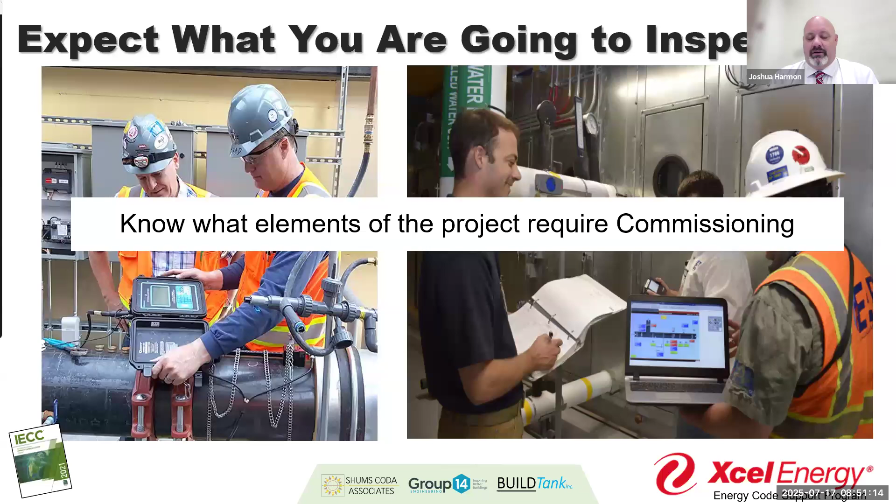For us as inspectors, plans examiners, and building officials, we need to know that information is there and coming to us. From an inspections perspective, I like to always verify the design with my plans examiner hat - like you guys know, most of the time I've done all of it, so I've done some inspection after I've done the plan review. So I walk into a building knowing I'm expecting office space versus service bays versus other things, and I can say, well, this doesn't match with what you said.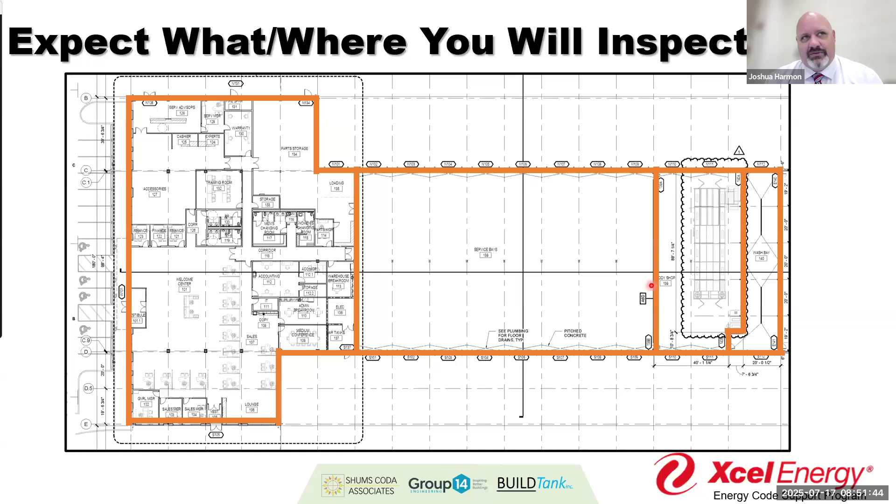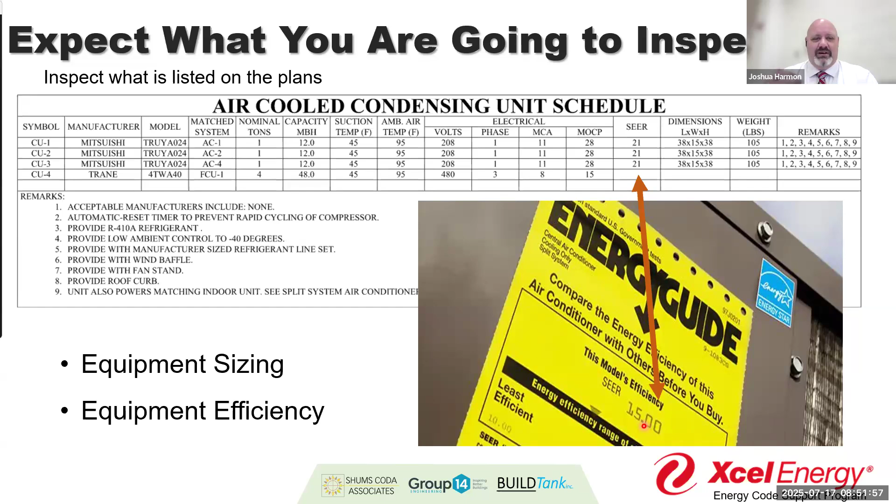I can see what the schedule says for equipment efficiency, and what I'm seeing in the field is not the same. So let's talk about that. What are we doing here?

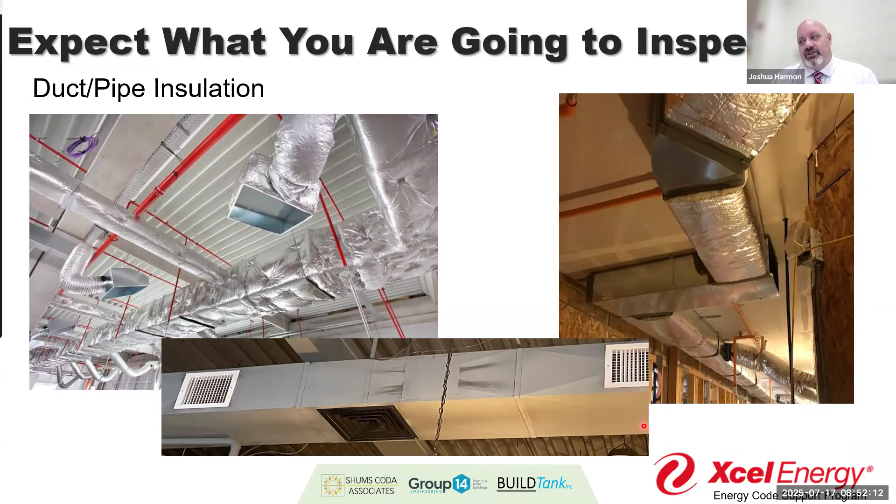Same thing with heating systems and the ducts we see, where they're located. We need to inspect for proper installation of those duct systems, as well as the insulation associated with them, and the controls that go with them. Making sure, if we're going to have these units in different locations, where are those controls supposed to be located, and how are they going to be incorporated into the design?

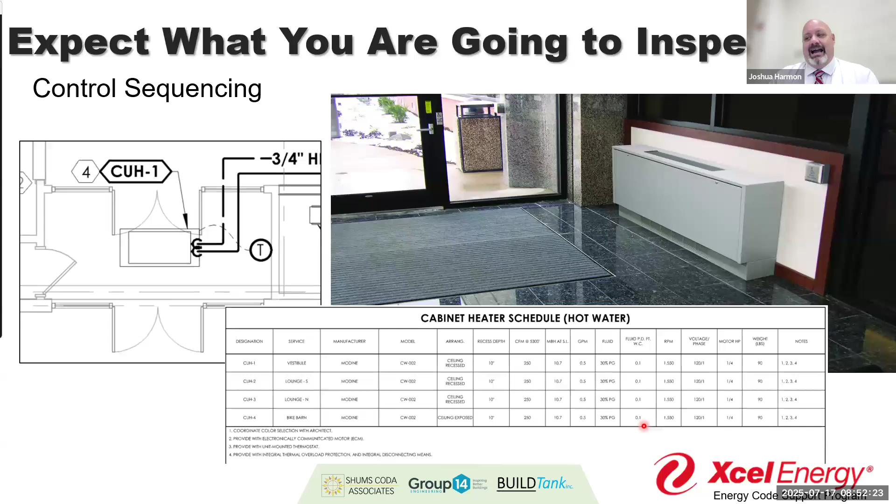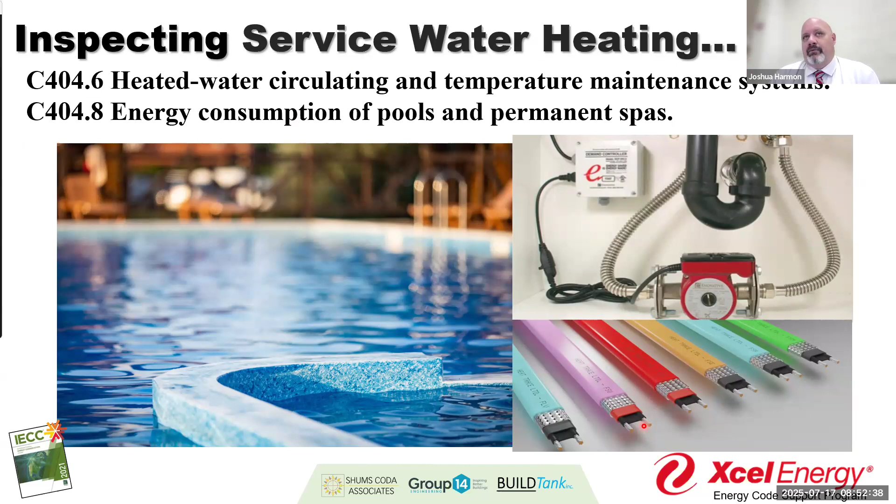There are some considerations for water, maintaining water temperatures, and preventing uncontrolled condensation associated with how different piping systems or boiler systems operate. So those are things to think about when we're doing those inspections.

We've got a few minutes, so we'll finish this out with the concept of power and lighting in real life. The last pillar we talked about was power and lighting. Power and lighting is all about understanding the amount of allowable power that can be used for lighting. We're not talking about general electrical operation, we're talking about lighting systems.

Now there are direct demand response controls that are starting to move into that conversation about how we manage overall power. I'm always interested in how those conversations go.

I was in a code hearing on Tuesday, and there was some overwhelming support for creating... I tried to, not stop it, that's not the right word, but provide some practical experience on proper location of demand response controls or occupancy-based demand response controls. What I've seen in observation is people will choose to plug everything else into another receptacle. So if 50% of my receptacles are going to be controlled, tell me which ones they are, and I'll plug everything else into the other one and overload that receptacle.

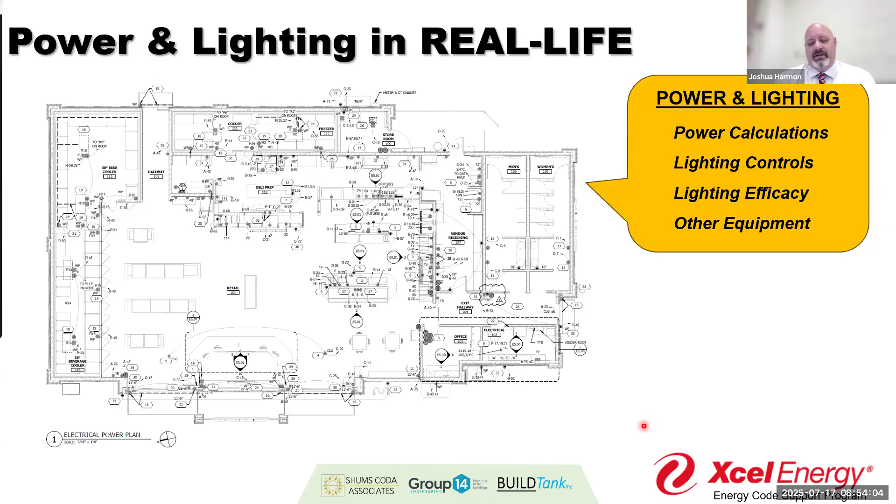Digression nonetheless, but there's a lot of people that want to push that, maybe moving beyond just power and lighting and into overall power consumption.

In that conversation, there are some things we've tried to easily summarize. It's all about knowing there was a calculation, knowing the area matches the calculation details, and then it gets into proper lighting installation and controls.

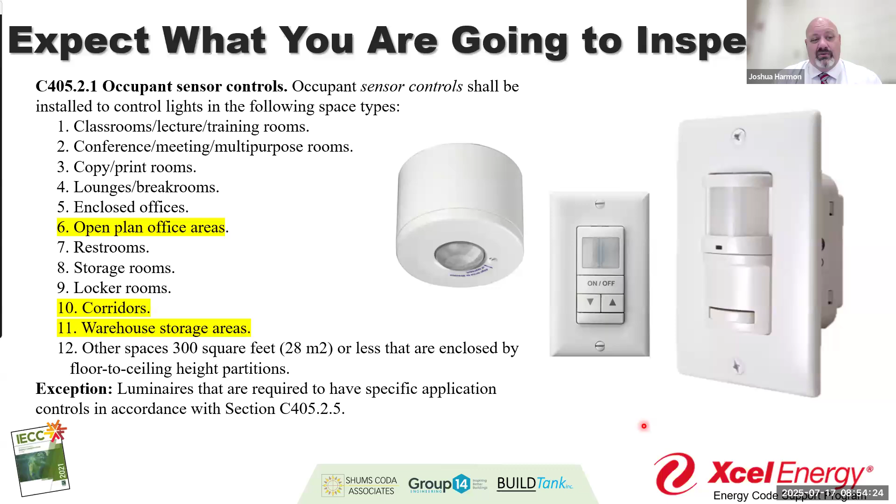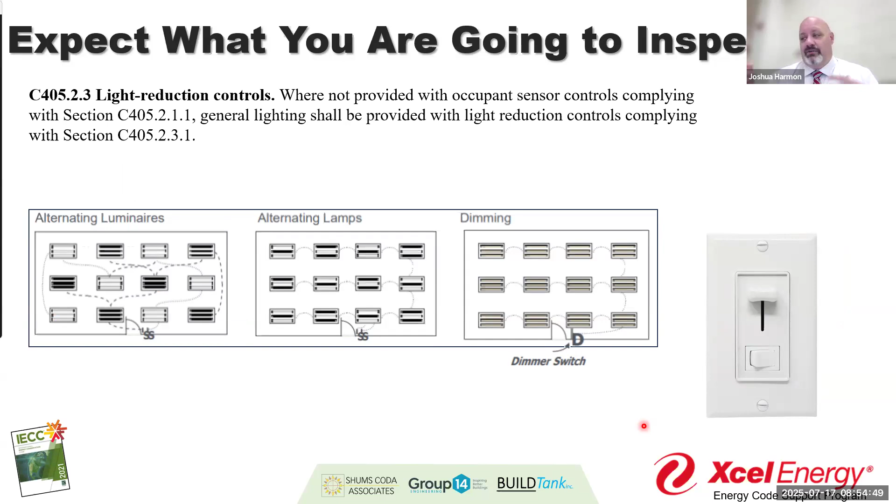When do we need occupancy sensors and what are they supposed to do? You can maybe identify where they're needed, but there may be some limitations on their ability to actually be functionally capable of doing what they're supposed to. Are they actually controlling? Do you sit there and start flipping the switches to see which ones alternate luminaires versus lamps? Do you play with the dimmer, or do you require some type of testing, especially when you start talking about exterior lighting systems?

I bought a nit monitoring tool, one of those nice long ones that you can aim, and it tells you the nits coming off a lighting system. That was expensive. And as a jurisdiction, it was something like, why are we paying for that? Have the contractor go get an inspection done, have them pay. That's probably a bad attitude, but it's one that I think is real.

We know there are certain things that need to be tested in those exterior lighting systems, and I'm not going to send a seasoned inspector out to sit at 10 o'clock at night to see if the lights turn off. It's important, and so I need you to do some kind of work to make sure it's working properly.

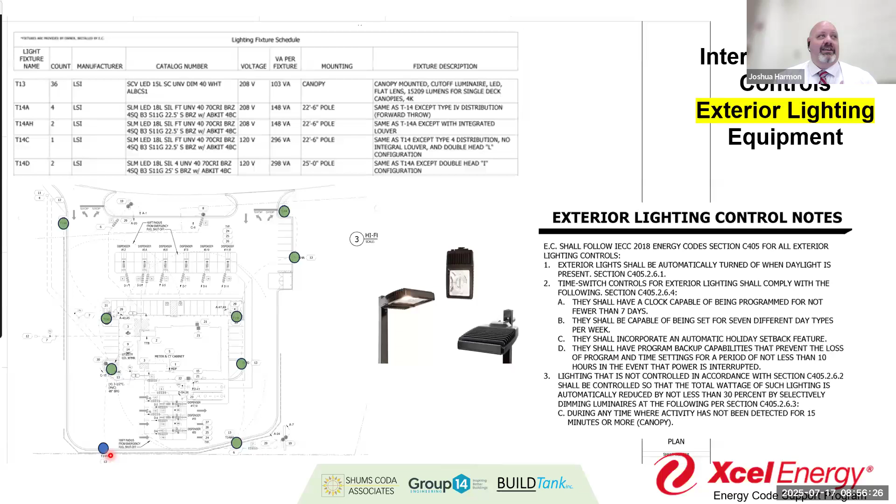And then again, those automatically turn off. So not only is it in the controls, but as an inspector, I'm making sure they're wired, and I'm going to ask that question as we're installing all these lights. So where's the one with the sensor? Oh, it's this one. Okay, well, at least we know you know, and that you know I know. So let's make sure it gets wired properly.

We know that inside that context of power and lighting, we get into the idea of EV power infrastructure. As an inspector, I'm going to be verifying a little bit more than probably before 2024, that we've got the right raceways and capacity for these different EV capable spaces. Again, it's part of that relationship.

So you may end up having conversations where, hey, where's the EV on this? This is a little bit unique, but it's becoming more prevalent, being integrated into design conversations and code adoptions. But more importantly, we want to make sure we think about how this is being installed, where it's needed, and how I, as an inspector, am verifying that.

Remember, this may conflict with other local expectations, but it's the most intense of those two that's required. So if the energy code says I need 15% in an R2 occupancy, but the zoning code says I need 10, then I need 15.

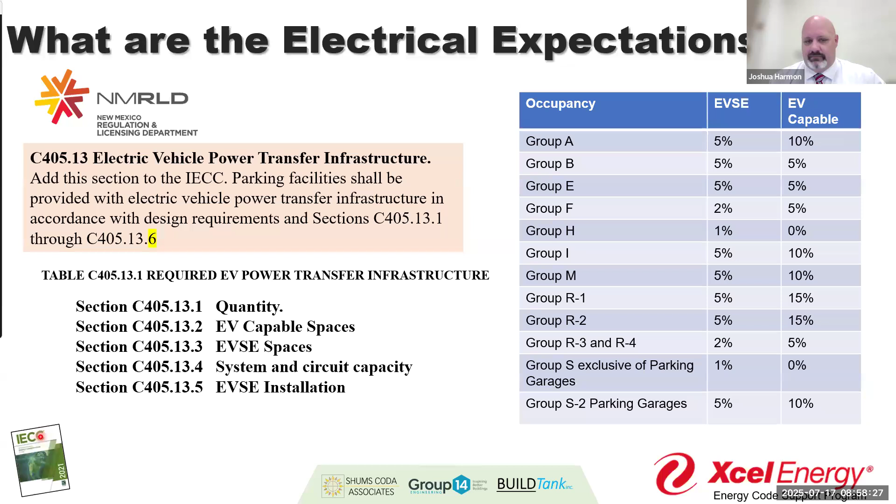And if the zoning code, say for an economic development zone or CRA, some unified plan set or plan development, requires 30%, then I go 30%. I have to at least provide 15 as the state's code requirement. So if the local zoning or regulation is lower, I go to the state. If the local is higher, I can just go to the local. But it's the minimum expectation to have this number of spaces.

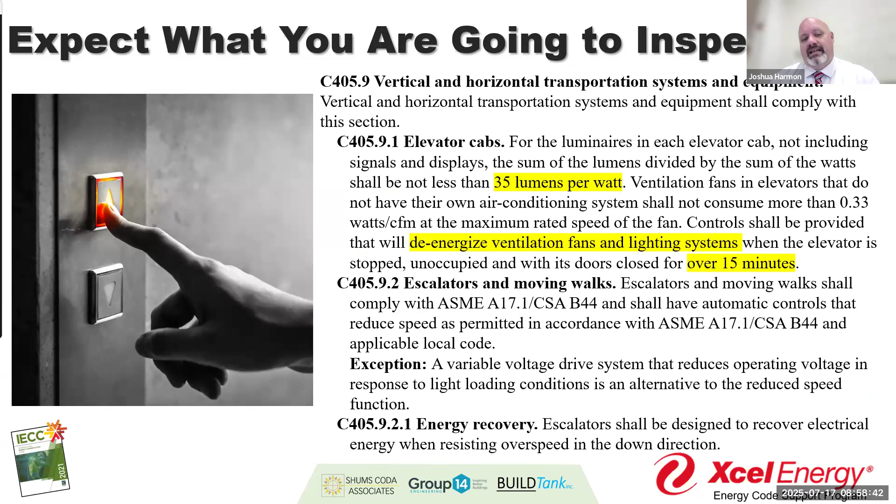I've got 2 minutes. Remember, there are other things we're going to be looking for in this process. Not every building has an elevator, not every building has an escalator, but we're going to look for those kinds of things as they come up. We put that in the list, and we also provide a list of additional efficiency options.

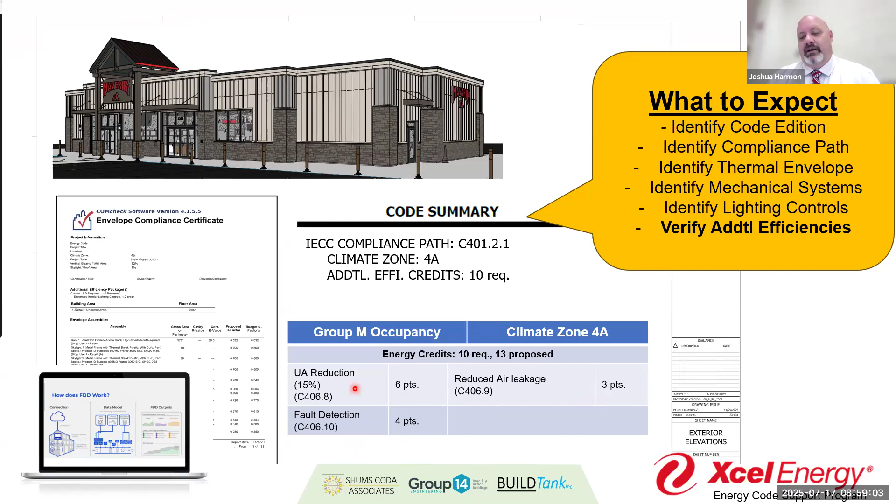As part of being in a commercial project, there are certain things we're going to be doing that are a little bit different, so we need to make sure those are properly documented on the plans, so that if I'm in the field, I can make sure I'm looking for some of these things. Some are easier to see than others, but again, am I doing some?

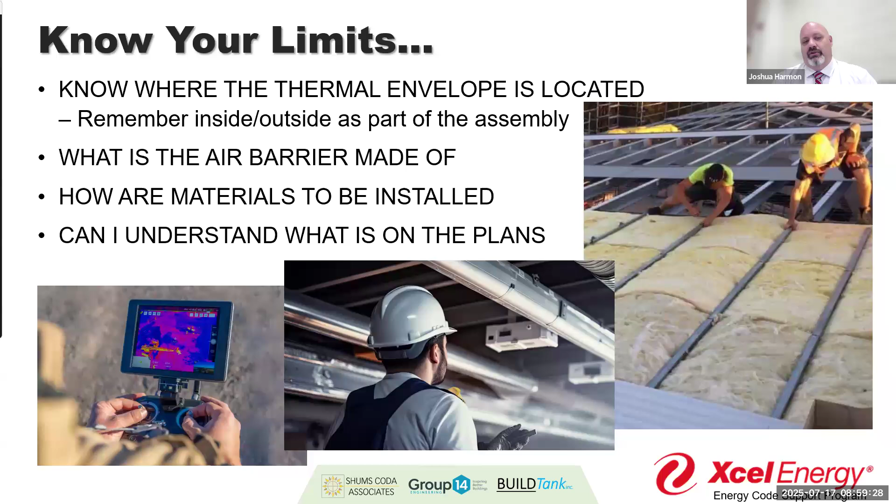Part of that is knowing our limits, right? Knowing there are certain things we can do, certain things we can't do. But we do need to always know where that thermal envelope is located, what we're doing for that air barrier, how those materials are being installed, and to what degree can I, as the inspector, understand what's on those plans. But recognize there is a future, there is new technology coming out, and that's part of this conversation, and what we'll be looking at in the future will be a whole new conversation as we all walk together.